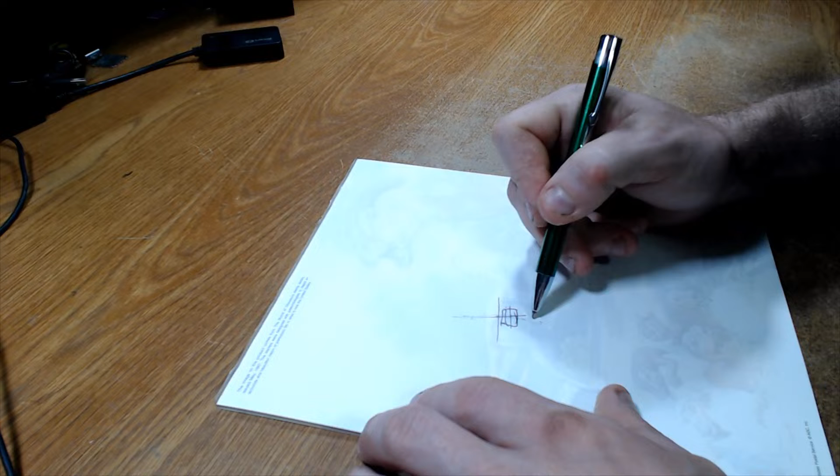Basically a joystick, as far as I've researched, is an axis on a flat plane. And as it turns out, they actually use the same exact centering mechanism that I was going to use originally in the Muse Dash left-right controller, which is a spring. So the spring is just down here, and when the axis goes off center, the spring wants to recenter it because it wants to extend all the way out. So it's a compression spring. It wants to go back to neutral, and therefore neutral will be the longest distance being straight up and down.

So we will design around this basic format, and then for the general design, again, I want to do a palm shaped, so a half dome shaped controller. Palm shaped is not quite perfectly circular, right? We'll deal with that as we get there. And that will just go on top of this axis. It will just look from here down like a regular old joystick axis with the micro switches around the corners here. And I will be going with micro switches as opposed to an analog input, just because, again, as it turns out, arcade sticks use micro switches, and I would like to keep with that.

So anything else to say? Oh yeah, buttons. I do want to have some buttons built into the control itself. I've been thinking about it, and thumb obviously makes sense. Thumb button makes sense. Two buttons here, left, right click, makes sense. I don't think it makes sense to have either of these two. A button on this finger can be a little tricky depending on the shape of the thing. So for example, if I make it full palm shaped like this, you can see how this button going on the corner here is kind of awkward to hit depending on how that lines up. My finger doesn't really want to go in that direction.

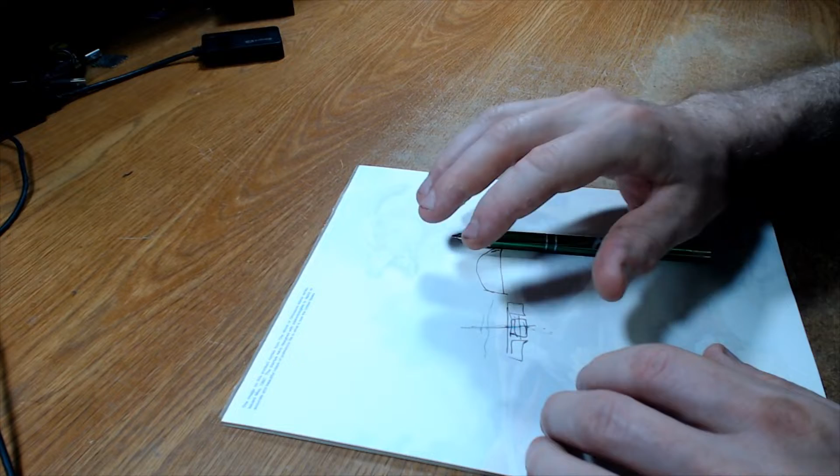Plus, just basic tendons, these two tendons are together, so you're more inclined to click both of these at the same time. And for the pinky, depending on how round we have this, the pinky is going to be in at a weird angle, so I'll leave the pinky off. So we'll just have three buttons: left click, right click, and then the thumb button. I also toyed with the idea of having a 3-axis controller, but I think that's a little ambitious at the moment. Maybe we come back and add that later on, but 3-axis is probably more than I'm looking to engage in at the moment. So that is the plan. Not much drawing today because it's all very straightforward, all stuff we've seen before.

One thing which I did not bring up, which I will bring up now, my research, because I did not have a great idea of how exactly. I mean, obviously, from when we did the first setup of the prototype, I did not have a great idea initially of how a joystick worked. Again, I assumed it was analog, just like everything else. And by everything else, I mean just like a game console controller, and that is evidently not correct.

Also, I am glad I am previewing this because that is not the window I was looking for. Okay, cool. So let's swap you out to, let's see if I can find this one. I just wanted to get this page up. There it is. All right, cool. And push live. So I did come across this page, which was very useful, and it's a Slagcoin joystick page. And not this one. Let's see.

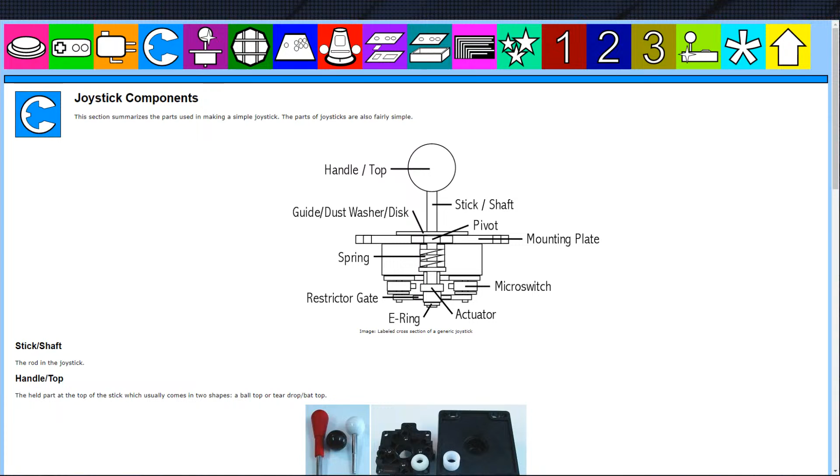Otherwise, like I said, it turns out that they're built more or less with the springs how I just assumed it was naturally built, which I was quite happy about. So anyway, just wanted to throw that page out there, I was very happy to have something to confirm what I was thinking. So let's hop back to Fusion. Fusion, because I have to capture the full screen, is full screen, so I gotta actually minimize the other window.

Alrighty, so as you can see, I already got the basic stuff up in here. You should be well familiar with this if you watched all the other segments of this series. The prototype controller obviously is built off of these 2020s, so we just got that in here. I've got, I believe, some parameters brought in. Let's check. No, not really. Never mind, I take it back. So don't actually have parameters, but we don't really need them. So we will go ahead and get to building.

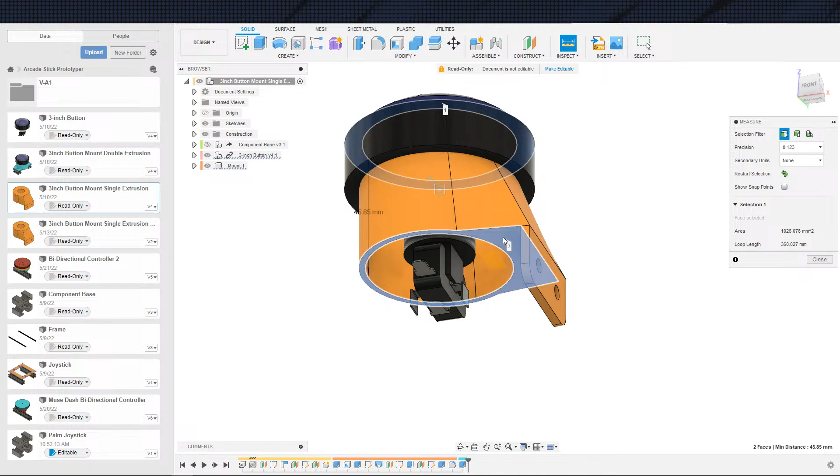And I believe 30 millimeters is my height. Let me check that really quick, actually. Let's open up a previous one. Well, we'll open up a couple of them because I think there might be some variants, but I'm not 100% sure. 3-inch button. What's the top of this guy right here? That right there. Okay, that's 45. Just to get a baseline height of what I had these guys at, 44. So actually about 45 it looks like. Let's check the Muse Dash controller. Top of that to that, 47-ish. Okay, so yeah, around about 45 is where I'm starting at.

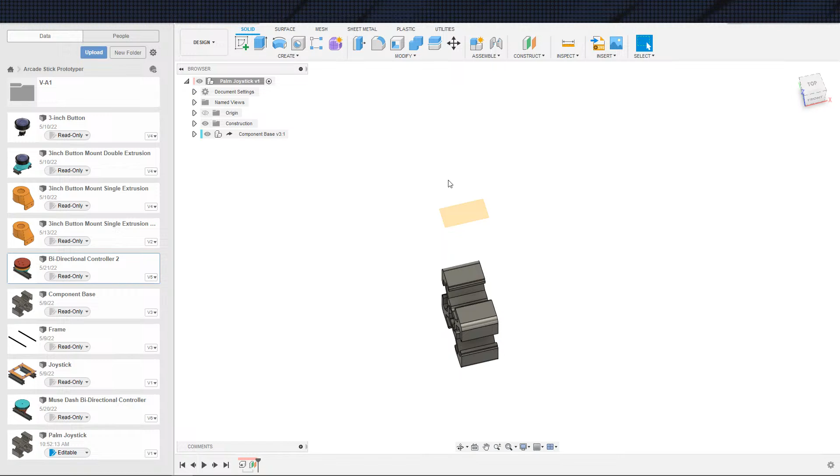Maybe this is 30 right here. I don't know. Actually, it's easy enough to check that, so may as well check it. That's 27. Don't save. Inspect. 30. Maybe that's where I got the 30 from then. Maybe the bottom of the button is 30. 28. Alright. Probably just rounding in my head. So we'll stick with the 30 and figure we'll make up the difference to 45 along the way. So this will be the base, or the pivot point, I guess.

So let us make a new component. And let us see. What is this going to be? I think this is going to be the mounting plate, is where I'll start. Let's grab that, and we can turn off the 2020 for now. We'll come back to that later. And no reason for it not to be round. There's that. So this is going to be a hole in the center where, wow, can't talk this morning. Amazing. This is where the pivot point is going to be.

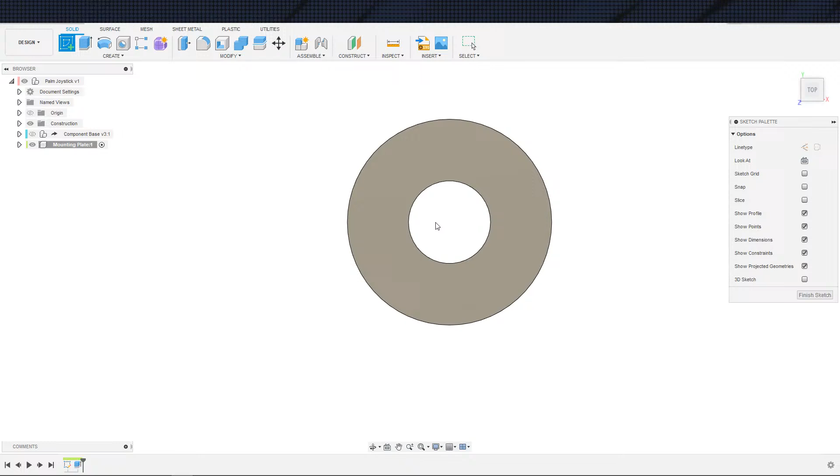And on other joysticks, you'll often have a plate around the shaft that moves with the shaft and takes up the extra space so that stuff doesn't fall in between the cracks. So if you imagine, if I extrude this out really quick, 10, whatever. And then I've got a shaft in here. Just drag it up. So you can see how there's this gap in here because the shaft needs to pivot around this area. This inner hole determines the swing, basically, of how much it can move. So because we have that in there, we have this hole now.

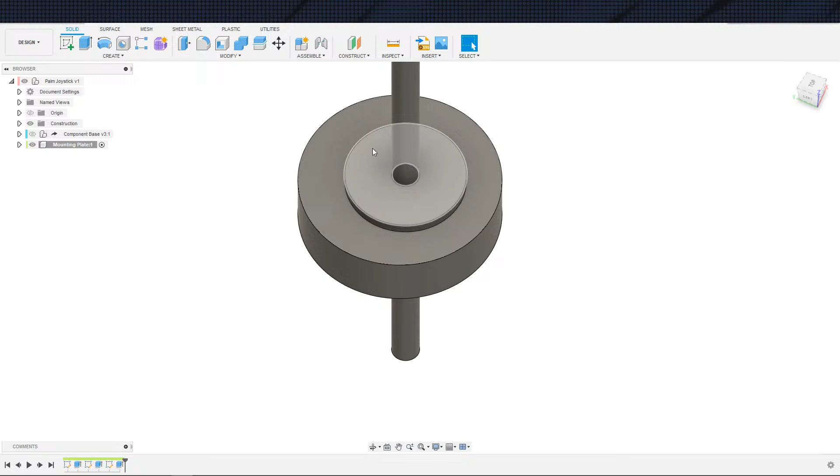And oftentimes what they will do is throw another disc on here and extrude that out like this, and that way this disc can move around to cover up the hole. It's larger than the hole so that the hole is never exposed no matter where the shaft goes, and it's tight to the shaft so nothing falls between the shaft and this disc. So that's how it's normally set up.

But because our design is going to have the large palm area on top, there's not really a need for us to do that, because that's going to cover up and keep anything from getting inside anyway. So I will not bother putting that disc in.

And the other question actually is whether or not I don't make this mounting plate a half hemisphere as well, or roughly that shape, just because as we pivot around, our shell that's going to be on top that we're holding on to with our hand, that one of those things can go over the edges. That way it's not impacting on the edges because it's larger.

So for a normal joystick, let's swap back over there. Which one was that? Which scene was that? Preview. Where is the joystick? Okay, there it is.

So for the joystick, you can see how this shaft just has the ball on top, and therefore no matter how far you turn it, it's actually going to impact on the inside of this hole before anything above the shaft, the handle top, hits the mounting plate. So for that reason, it's not a problem.

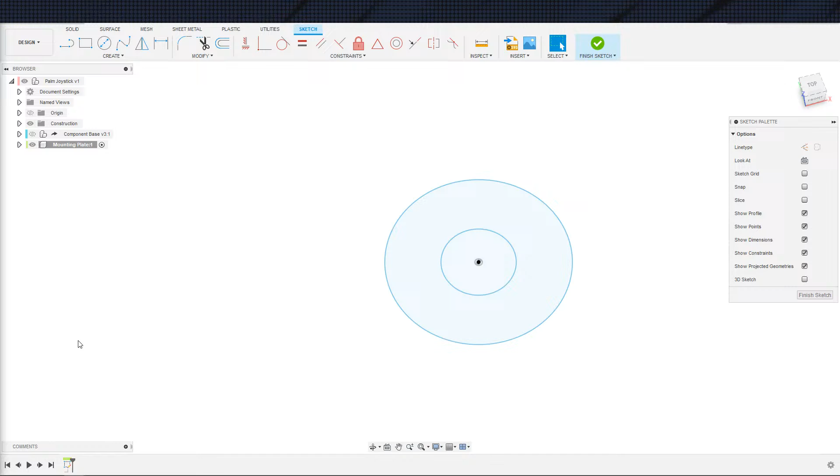Now, technically speaking, the mounting plate should be mounted, quote unquote. So we're kind of changing our definition a little bit, but that is the point I'm getting at. So back to Fusion. Push live. There we go. All right. So we are back here. And now we got questions.

So for the shaft itself, there's a couple things, right? One is swing. Let me just do this in Fusion, because having the computer do math for me is a lot easier. Ignore these guys for right now. I'm just going to construction line them so it's easier for you to ignore them. So we're assuming this is our joystick shaft right here, right? And let's say we want to go 30 degrees. And again, 30 degrees just being a round number, a divisor of 360 is how I should put it.

So if 30 degrees is the offset, which, per the Muse Dash bidirectional controller that I made, was actually a little bit overkill, I found, but we'll deal with that as we go. Especially because the other thing with actual joysticks, and I did not incorporate this into the Muse Dash one, but you can reposition the micro switches so that they're closer or further away from the pivot point to make the swing greater or less. This 30 is just nominal, and we can adjust it on the bottom side with the micro switches. So that all being said,

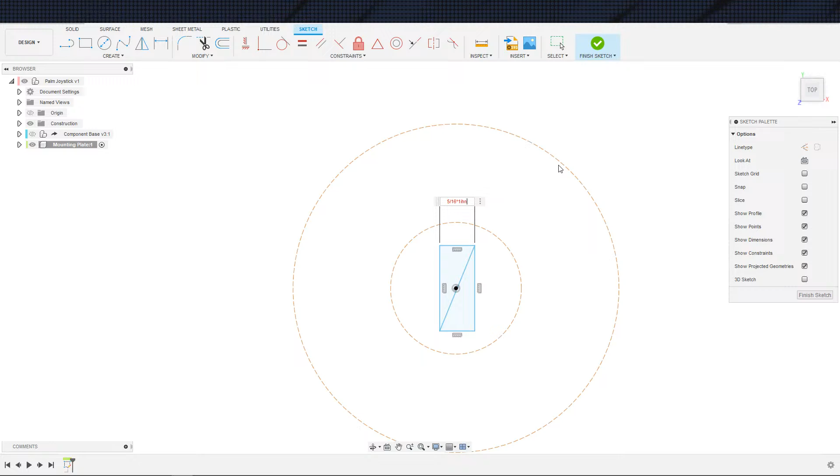basically what I was getting at here is I should probably not draw these as lines. Okay, that is just that one. I'm thinking of using the 5/16 rods that I keep on using because I have them for free at work. Okay, and then if these go off 30 degrees, then basically I just need to make sure that the distance here is 30. There's that. And you should be a right angle is my problem here. Right angle, there we go. So I'm just double checking. Okay, everything seems to be looking correct.

So my point being is that, and I could have done math on a piece of paper, but I am lazy. So basically, if I take the midpoint here, this is my radius in theory before the shaft clips the edge, which is about 5¼ millimeters, right?

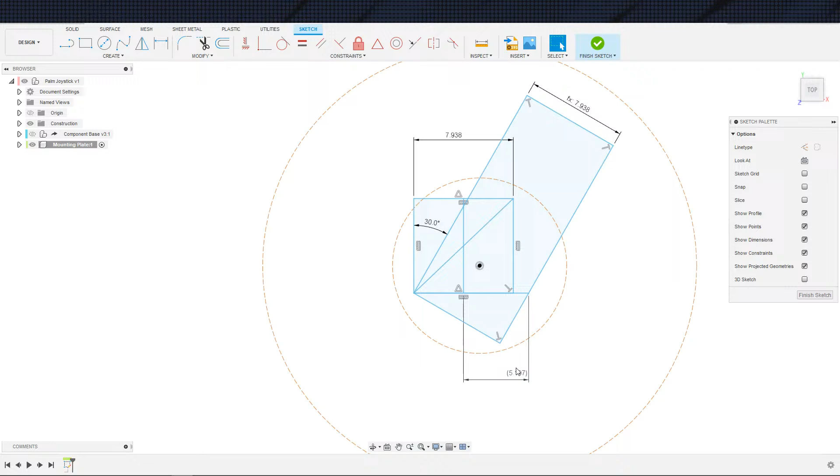So the shaft, when it's off on this angle, the edge of it across this axis right here, again, this being my mounting plate, in theory the pivot point, the top edge of the pivot point, in theory 5¼ millimeters. We'll make that 6 just because, why not? So long as we make the radius 6, which would be a 12 millimeter diameter, we should have enough clearance for the stick to swing.

Yes, delete. So I will go ahead and unconstruction line these guys, and we'll dimension this out. So we said 12 there. And then this one is kind of whatever for the time being. Basically, I'm probably going to come back here and redimension this after we have the top handheld portion done. It's one of those things.

The only reason I'm starting on the mounting plate right now is because I went from the base. Had I started designing this from the other direction, again, a million ways to skin a cat. Had I designed this from the palm downwards and positioned the other pieces relative to the handheld part, as opposed to starting in the middle and positioning the handheld part relative to the pivot point, I wouldn't be running into this situation right now, so that is where we're at right now.

The other thing I should mention is I kind of like the aesthetic of the dome-shaped mounting plate. That's going to be, as I mentioned, a little bit hard to mount to anything. However, one thing we could do if we didn't want to deal with that is just make the mounting plate smaller than the palm holding portion. That way it never actually collides because it's outside of the edges. So that is another option we will consider going forward, but I did like the aesthetic of having the mounting plate follow the contours of the palm as it sweeps around.

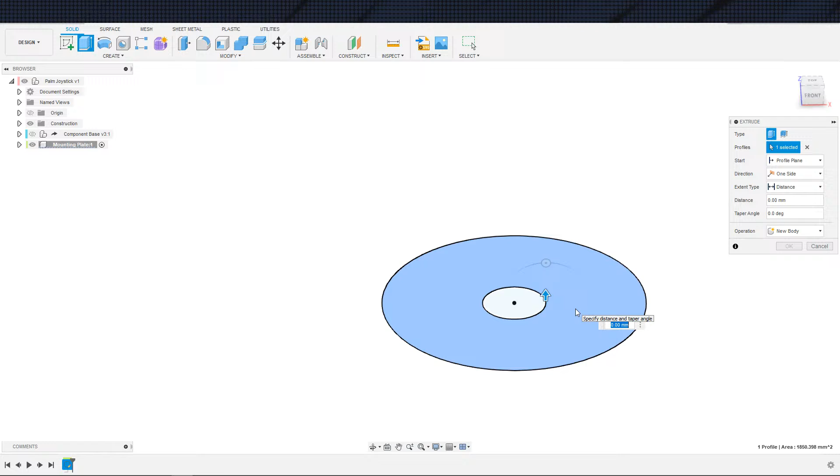So anyway, with all that said, we'll make this 50 millimeters for the time being and extrude it just so that we have a point of reference. And actually we'll extrude it down, I take it back. So this is going to be minus, and let's call it 6. We'll make it a bit thick for right now. So that's the mounting plate, and now, whoops, do not ground that. Grounding is not horrible, it's not going to screw me up immediately, but I still do not want to deal with it right now.

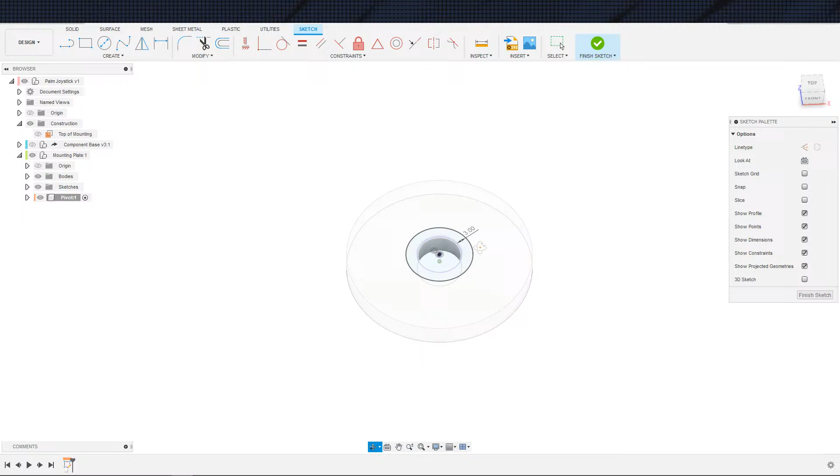Pivot, let's make the pivot really quick because that is simple enough. And I will use this top mounting plate as my starting point. Reference this hole. Okay. Go about 3 millimeters wider is what I'm thinking. And actually, well, all right. So again, there are a bajillion ways of doing this, and I think I will not be doing it this way. So let's hop back here and let's use the revolve tool instead. So let's project the top of that. Okay.

And then we are going to go ahead and, not what I wanted. Do that, do that, do that. Actually, let's keep that guy on for right now. And then we can do this here, which is 3 millimeters. Yeah. No. Actually, there's a few different things happening here, right? So I said revolve. So that's what I'm going to try to use, but I'm just thinking I probably should.

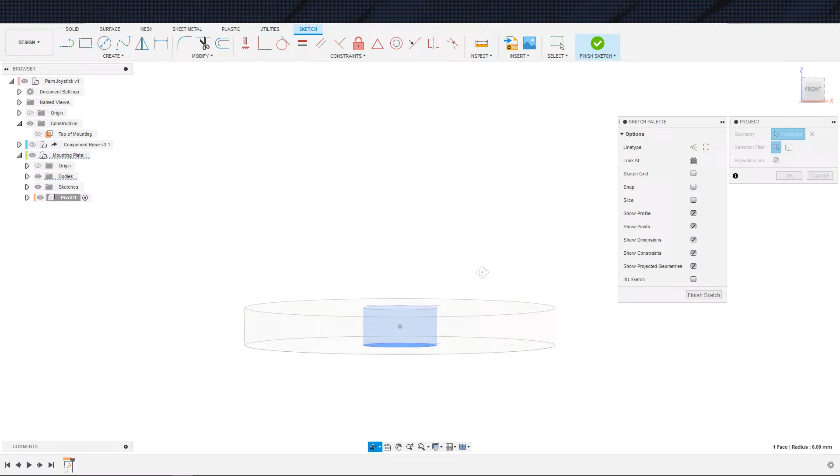Actually, let's go forward in the timeline a little bit, and let me just reproject. See, I wanted to get this hole in here too, is why I stopped. Okay, I guess that is selected. Because we also need to do this. And honestly, I was going to revolve 180, but I guess it makes more sense to not do that.

Actually, I should go ahead and throw, actually, I know I keep on saying actually. We will try to find other words to substitute.

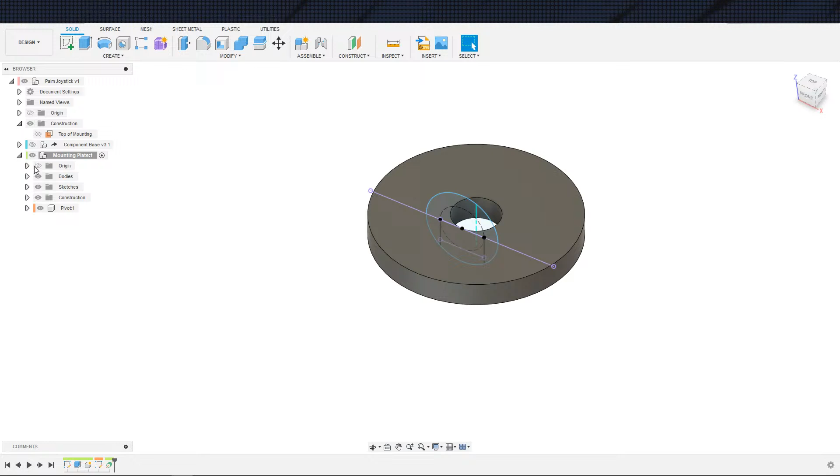Where's my, oh, there it is. Cannot see. There we go. Axis. And how did that plane get off center? No, you should be centered. Why is my mounting plate not on the origin?

Am I grabbing another sketch right now? Why can't I delete this quinkadink? Delete? How many quinkadinks are there? Just that one. Okay. Huh. Okay, whichever. I do not know why you were not on origin, but that should solve our issue.

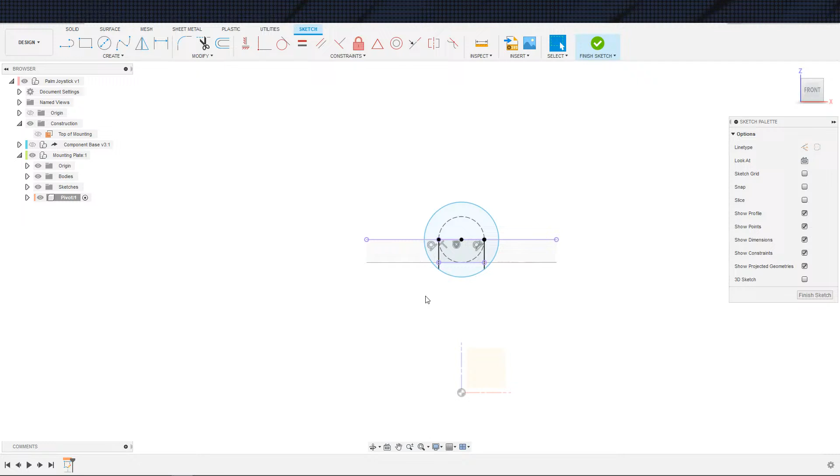Alright, cool. Now let's get back to this. Turn that body, or let's make sure we're in pivot first. Turn the body off. Grab that. Use that axis right there. And there's our hemisphere. Easy. And I have already made a mistake. Okay. This should be 5/16. This should not be the full size. Nice. We're off to a great start today.

I guess I will use a square and center it on this. Make those construction lines, make that 5/16 of an inch. And then do this and make that collinear with that, just because I prefer to have it collinear. And now let us try that again. Finish, revolve, boom. Axis is that axis I made through the center of the torus. I don't know if I selected that correctly. There we go. And that should be correct now.

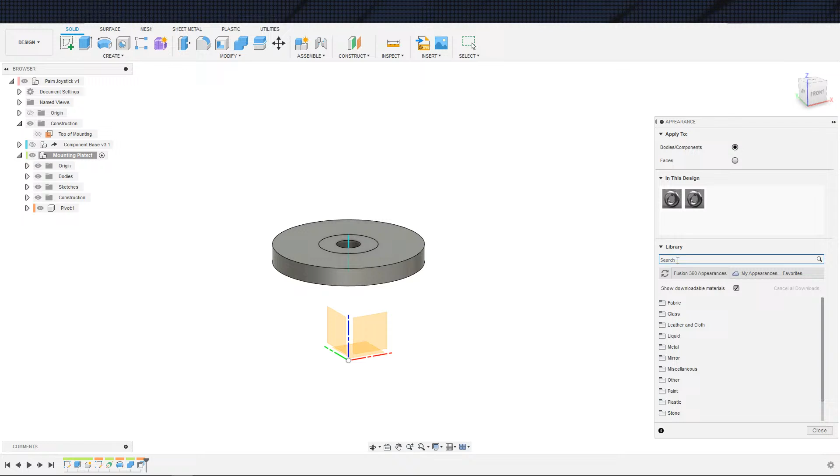Good. Now we can just go ahead and combine-a-roni these guys. Cut. Keep tools. Okay. And then I will go ahead and offset that face because this will be 3D printed and I need a little bit of an offset because my printer is not perfect. And we can go ahead and color this white nylon because in theory it should be something like that. Nylon. We'll make the base plate black plastic. There we go. And now we can move on.

I'm gonna go ahead and turn this axis off. That's fine. And let's throw the shaft in here. The shaft is kind of not part of the mounting plate assembly, so we will go ahead and make a new component. I'm gonna call this, rather than shaft, because the shaft is going to be connected to the handle and also in theory the actuator, which is, just for the record, let us get this up.

In theory they put this little ring at the bottom here, not even a ring but a little bumper at the bottom of the shaft to impact the micro switches. It gives you a little bit of extra precision on hitting the micro switches. I don't know if it's 100% necessary, but it definitely does help, so we will also be having that on there. And let's see, the spring we know about.

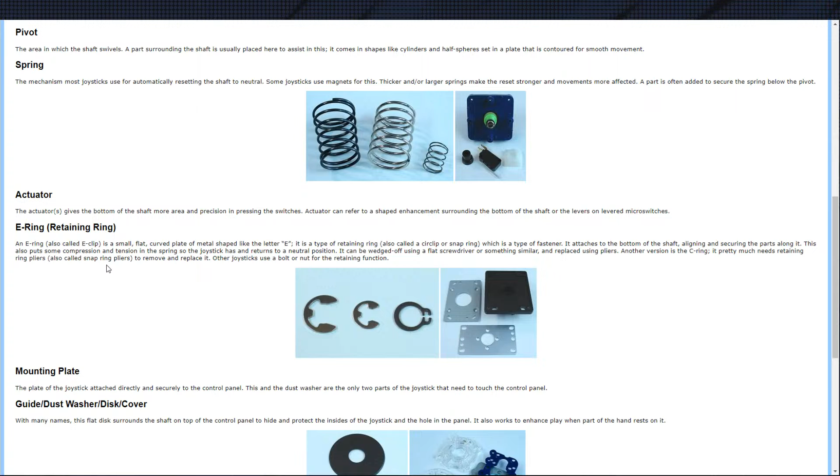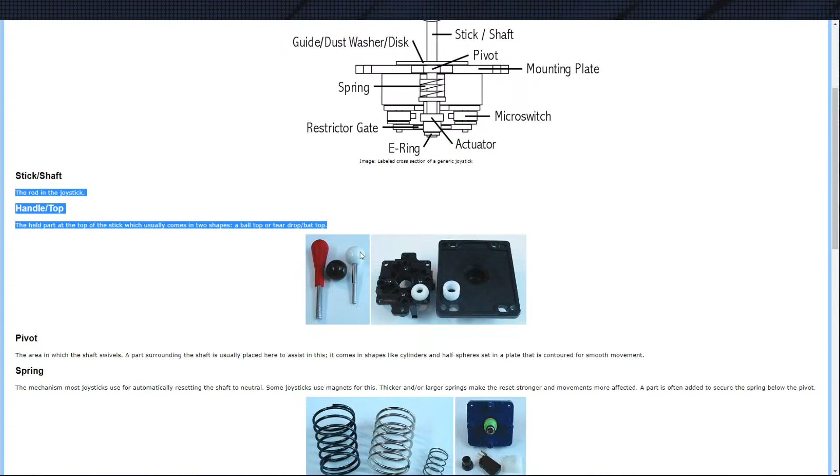I'm guessing that's what these retaining rings are for. I didn't actually read what these do, so let's take a quick look. Yeah, put some compression and tension in the spring. So I guess they do help keep the stuff on the shaft in place, in theory. I don't see them on this diagram, but I'm guessing that they do help align that bottom mounting plate. I'm kind of surprised that plate doesn't slip down from the spring. Because I don't have one of these controllers, I don't know how much force that spring generates.

I did take a quick look at some springs on Amazon for joysticks, and I do recall seeing some weight mentioned. I just can't remember what it is at this point. And the only reason I did that is because I was looking at these guys. These two right here look like they might be a little bit heftier than the wire that I have, which is, what's my size wire again? 0.037. So 0.037 is the heftiest I've got here.

They look like they might be a bit thicker, but this guy on the corner definitely is not thicker than my wire that I have. So I figured I could probably get away with it with the wire I have here, which is why I did not order one of these springs off Amazon. But in case you were wondering and you don't have music wire sitting around for springs, they do sell them on Amazon, so you could just buy one. All right.

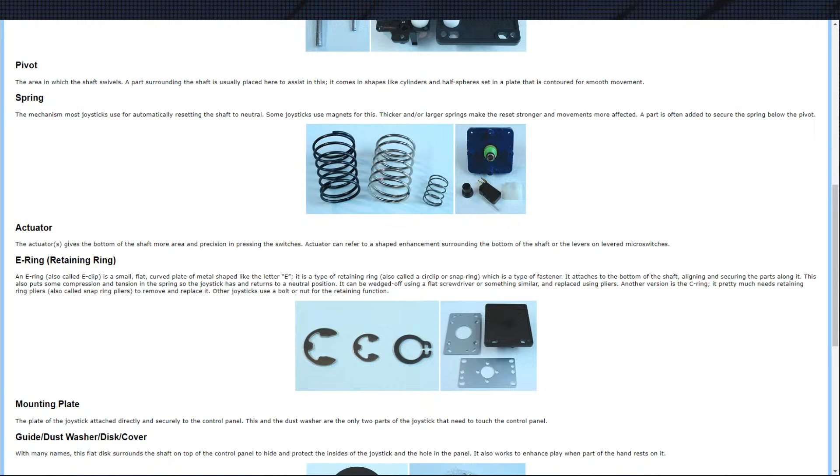So, you're going to see a background here in theory, and then I'm going to kick you over here. All right, so we are back here. I'll just call it the shaft assembly. This will have the shaft, the knob on the top, quote unquote, the spring, the retaining plate, and the actuator. Those are the things that we'll be designing into this portion. So we'll start with the shaft.

So let us just use that top of mounting plate as a reference point. We will project out this guy. Let me turn that origin back off. And we can turn the mounting plate off at this point. I want to make sure that this is my 5/16 times 1 inch. And this will be the shaft. I probably should have made the new component first, but we will cry about that later.

Now, the height is a little bit up for debate at the moment because we're going to have some extra clearance, because I wasn't going to make the mounting plate intersect with its arc. So, in theory, we can make it a bit shorter than normal. I'm going to start at 50 millimeters. I will make this two-sided though. We'll go 50 that way, and then the other direction I'm going to go at least to there,

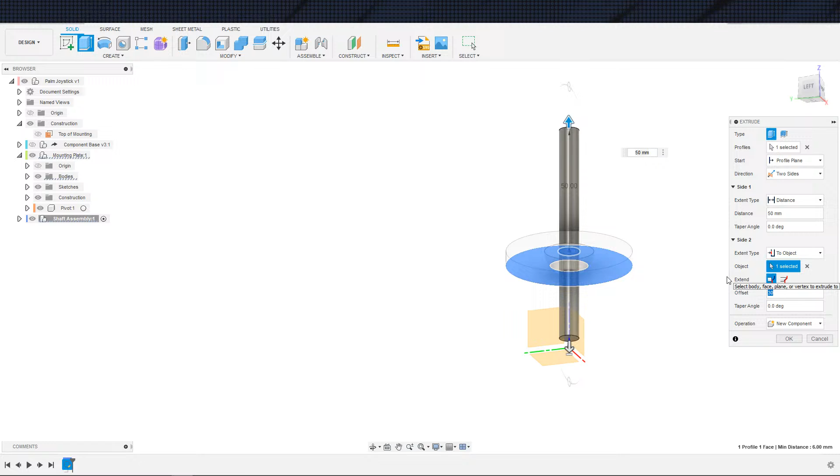and then maybe another 30. Actually, no, the spring has to be down here too. The spring, if it's an inch, is about 25, and then another 25. So I guess it's going 50 down as well. All right, so there we are. Let's open this up really quick and rename you to shaft. I'm thinking we may as well just make the interesting part first.

So, new component, handle, knob, what do we want to call this? Yeah, we'll just call it handle, that's fine. Handle's the first thing that came to my mind, so that is what we're going with. And this will be top of shaft right here. Got a name on that guy. And now we can start drawing.

This is going to be a little bit interesting to draw. The easiest thing, obviously, to draw is a hemisphere. And a hemisphere would technically work, but it's not exactly ergonomic. Ergometric. That's what happens when you use parametric and ergonomical at the same time. So actually I don't even need to take a quick look at some pictures because, give me half a second.

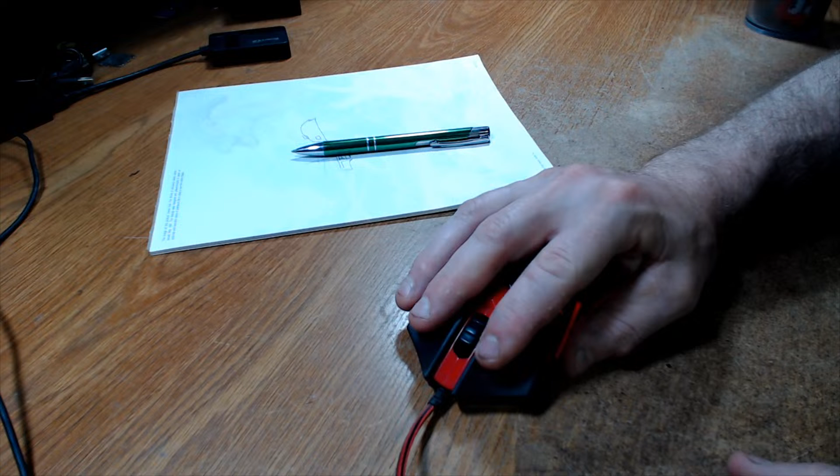With our controller though, if I make this more dome shaped, you can see how that brings my ring finger and my middle finger more in line. So if we dome it up a bit, that kind of takes care of that problem. It brings my ring finger closer to my middle finger naturally, just because I'm curving my hand more. So we can start with a more domed shape and then cut out along the edges. That is the direction in which I think I will be designing this.

Hop back to Fusion. And see, I started from the top again because I always start from the top, and this is another situation where I actually do not want to start from the top. I actually want to start from the side because I'm going to be doing another hemisphere, and it is useful to have the top thing there because I can just mid-plane it, unless that mid-plane came from the shaft. We are in the shaft right now, so it's a good thing I caught that before I completed that sketch.

So boom, boom, whoops, that was not the correct plane. There we go, that's the correct plane. Project out that guy, okay. Turn off the shaft, and we can turn off the mounting plate. And then, all right, cool, we do still have the mid.

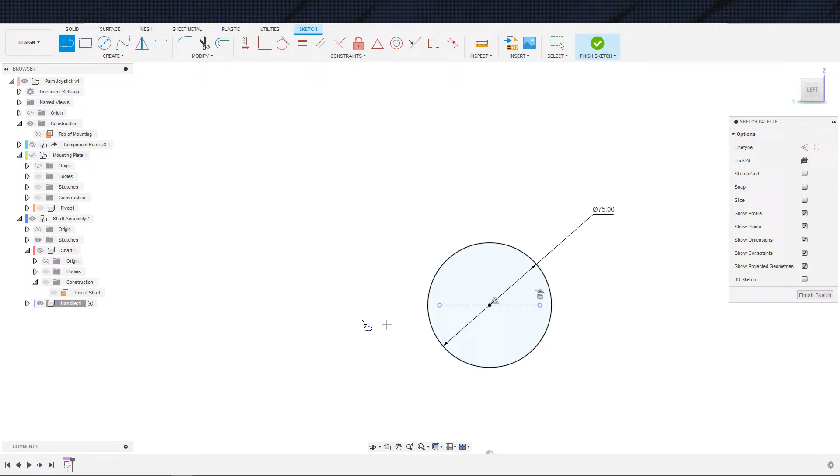We can make this a construction line, and then we want to go ahead and catch up Fusion, make this collinear, and coincident with the edges of the circle. And now we can go ahead and revolve this as well. Again, 1.5 million ways to do this. I'm using revolve a lot today just because I am.

But the fact of the matter is that you could have also just made a point and then... 180. 180 should be fine, shouldn't it? Why is 180 a problem?

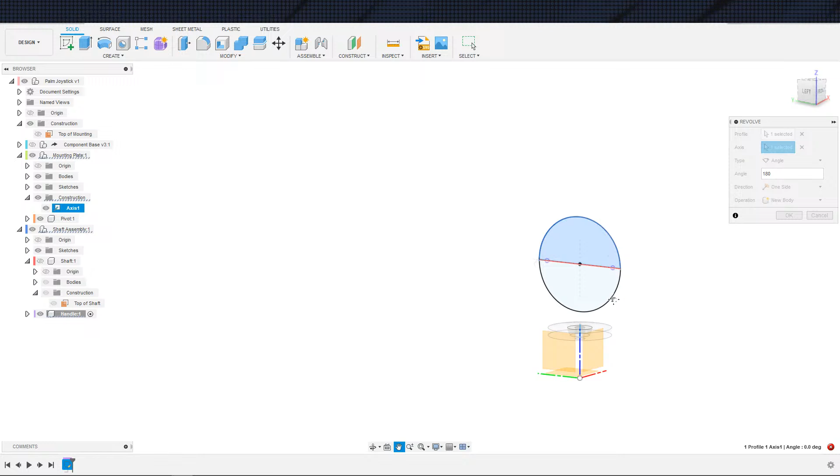So this will work now, and this will do a full 360 anyway, and I don't even need to use the construction over here. It looks like it reverted to being off, so there we go. So there is the basis for our handle. Let me just eyeball this up really quick. So the interesting thing is this may not have been the correct way to go about this.

And the reason I'm saying that is, let's turn the camera back on just because we're talking hands. So originally I went like this, and I just kind of measured with my left hand that from finger to finger, I'm like 3 inches, okay? Just from here to here, about 3 inches is about right. The fact of the matter is that if I make a 3-inch sphere, that means that the bottom of the sphere is all the way down here.

And it's gonna have a hard time getting its camera there, but you can see where the base of my middle finger is way removed from the center of my palm by quite a bit. We really only want it to be about 1.5, so working off a circle there was a mistake. We will go ahead and resolve that issue. We will come in here. We will ellipse. I'm just going to draw an ellipse here, and then I'll dimension it out in a second.

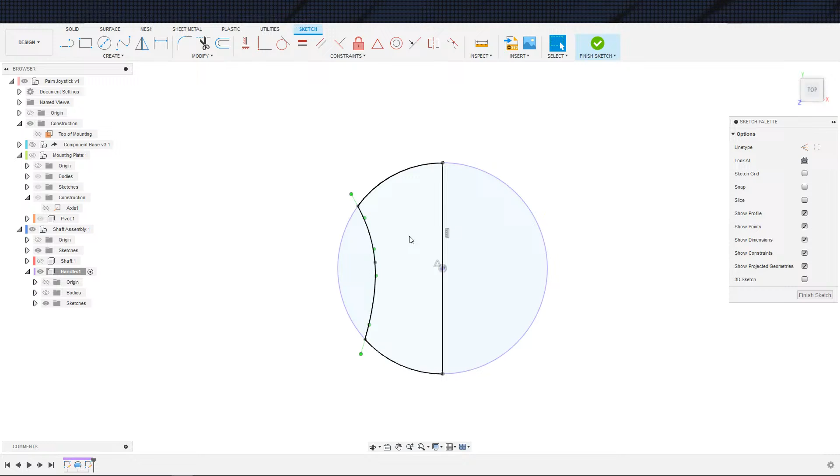My mouse is much flatter like this, and therefore the carve out for the thumb is much further back. It's all the way back here on my mouse. So let's switch you back to Fusion now and get you caught up. Obviously, all I did here was just take a projection of the ball and then cut it in half. Whoops. And like I said, this is going to be more or less centered, it looks like. So we are fine tossing this in here.

And tossing this centered on... Actually, you can't actually center that, can you? Okay, I can center this though. I can go here to here, put this parallel. And now that is centered, as you can see. And then it's just a matter of how we want this shaped, how much hourglass we want on this.

And we can also do stuff like this, right? We can also, because I'm using a spline line right here, do something like that. And actually, spline lines are a bit of a pain in the butt, because as you can see, you can do one and not the other. So for that reason, I am going to cut it in half, and then we'll mirror this way as well. So you can ignore what's happening on the bottom half right here.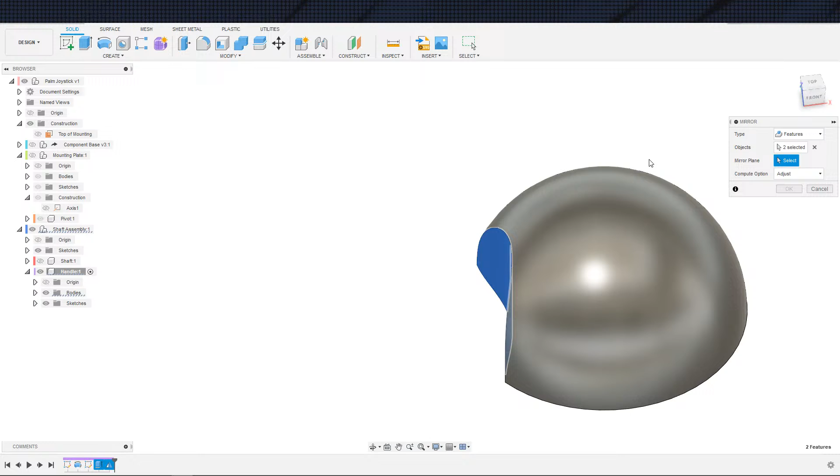And we are going to just cut out this top half. Bodies, distance all. We'll mirror it over top that, and then we'll mirror it across the plane. And that's how we'll go about this. Mirror, features, that guy, select, that guy. Okay. And then we'll mirror both of those guys, boink boink, over the center plane. Whoops. Man, I really wish the right click didn't work like that. Alright, there we go.

Now obviously this is a little violent right here. How does that actually look? Nah, I guess that bottom is not as bad, but we can go ahead and just toss these guys in here. Actually, since we already have the mirror profiles in here, may as well just add that as a mirror.

And it's a matter of how much you really want to go with this. I think I only want to go a little bit, just because any extra we do will interfere with the button that we're going to put in here, the micro switch. So I think I'm going to leave it at that for right now, and then we will compensate later. Alright, so there is that, and now we can go ahead and use the shell command and get ourselves a 2mm wall. Cool, cool, cool.

Now we can start building in buttons. Buttons. One of these things where how you design the button kind of depends. So, do I have any around here? These spare parts do not really show it terribly well, so give me half a second. I wish I had better spare buttons around here. Trying to find a good example. I don't particularly want to pull the controller apart. Alright. I think I'm going to draw this instead because I don't have a good example on hand immediately available.

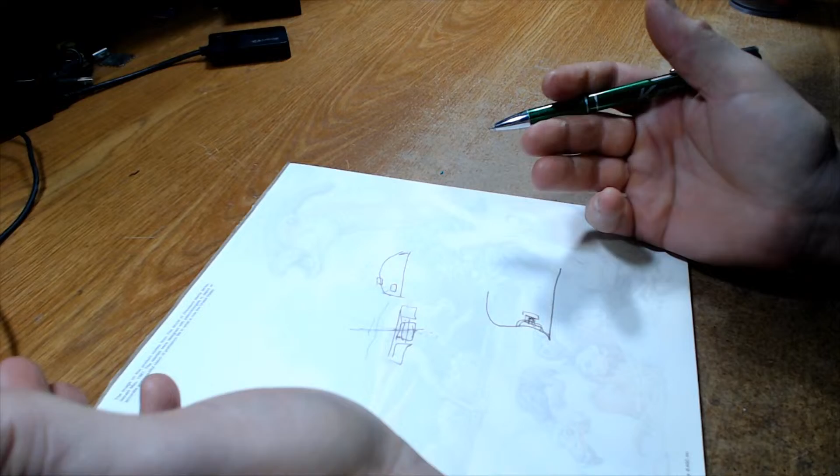The button is going to need a lip around it that is on the inside of the plastic to keep it from shooting out this way. And the reason it's shooting out that way is because it's going to want to have a stem that reaches in to hit the micro switch and a spring on that stem to reset it. And that is generally, and not always. So for example, we don't necessarily need a spring. I could skip the spring, to be fair, even if this is just a stem pushing the micro switch, which again, it's reasonable, it's not a bad thing.

And when I say micro switch, we don't even need a full-on micro switch like this, okay? Where's the actual micro switch? So we don't actually need something like this. Most handheld controllers, Xbox controllers, whatnot, don't go for a full micro switch like this. They just use regular little push buttons. Let me grab one of those.

I've got this nice and convenient random box of stuff right here that I don't organize. So I would have assumed that I would have some random button thrown in here that I never bothered reorganizing. Turns out I didn't. Turns out that all my buttons are organized right now. Let's check. My actual bag of buttons is inside of a big box of components that I'd have to dig through, so I'm hoping to find a button otherwise in one of these easier to access cases.

And by button, just for the record, I'm talking momentary switch. That is what, technically speaking, we're talking about. I do not see one in this container, so I guess I will be digging. Alright, time to start digging. Alright. Say hello to my giant box of components. Random components. There we go. It wasn't too hard. Cool.

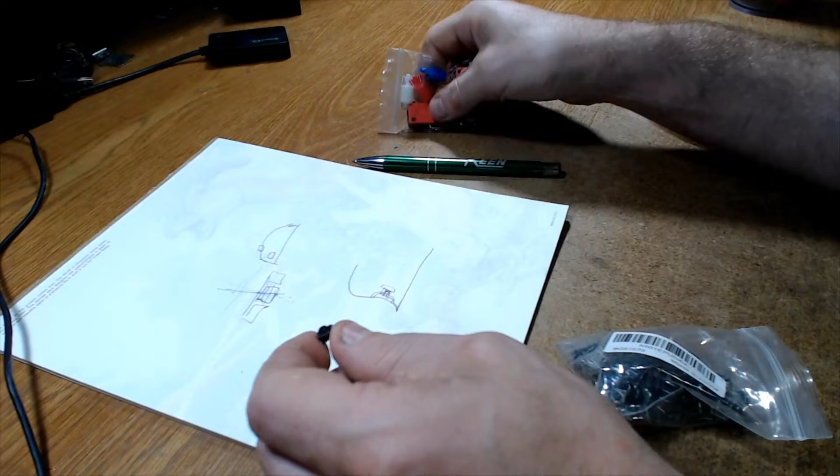So when I'm saying micro switches, we're probably just going to end up with this guy. The only kind of issue with using these guys in our specific situation is that due to the shape of our controller here, it's not like we can just toss a flat PCB and then plug this into the flat PCB, which is how it normally works. So your normal Xbox controller just has a PCB inside of it. This is sitting on the PCB, and then you obviously just bump into it with this stem that I was telling you about. So that's how it normally works.

That is a bit more difficult in our design because our design is funky shaped, right? Which is why, in theory, using a micro switch might be a little bit easier just because it has these mounting holes that we can just match to. But that is the situation as it stands, and something we're going to have to resolve, which makes our life a little bit more complicated.

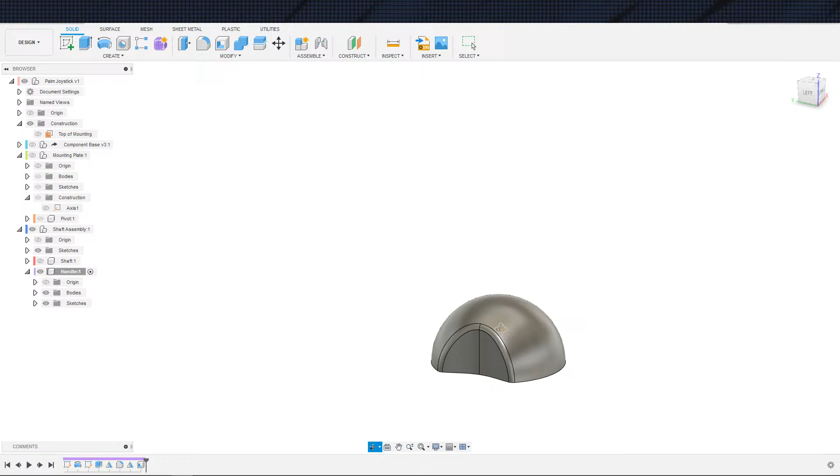So let's switch back to Fusion. Make sure we actually switch back to Fusion this time. And come in here. So over here again, left-hand side, in theory, because we're catering to mostly right-handed people at the moment, will be the thumb button. So I'll go ahead and attempt to take here. Okay, because that's curved, I cannot, which does make our life a little bit more difficult. All right, can I get a tangent plane? Tangent plane from the inside. Okay, all right. We can work with this.

I'm just going to do this, and we will project out to the surface is how this is going to work. So I will go ahead and project this surface, and then actually, let's see. So there's two different types of thumb button. There is the base of the thumb button, and then there's the point of the thumb button. It really depends. I kind of like the base of the thumb button better, which would be this plane here, as opposed to the tip of the thumb button, which would be that one there. That's a personal preference thing.

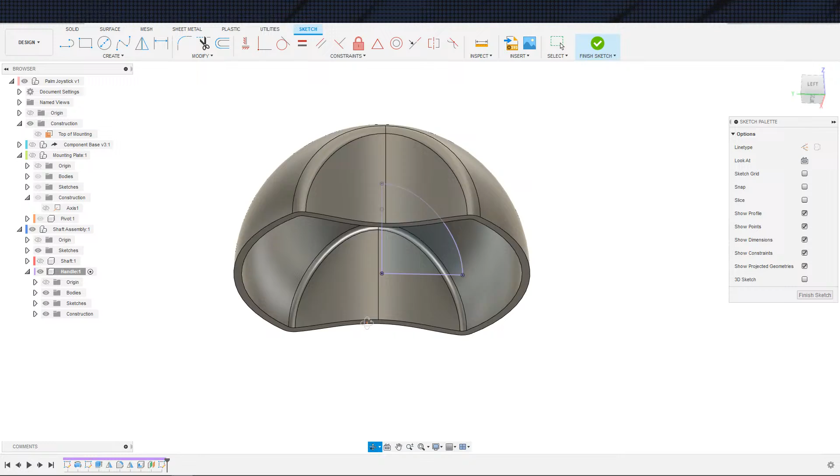Basically, you could do either, and the fact is that the tip of your thumb could just reach back to hit this if you find it a little bit awkward. So yeah, I think I am going to put the button on this face. Let's square back up to the body. And I think what I will do is make this whole entire profile and just inset it a little bit. So we will inset it by, yeah, let's start out with 2 and go from there, just because what we're going to need to do is build that rim around it, as I was saying, to make sure that it stays retained.

So let's do that. And yeah, I guess I will just extrude it and then do new component from here, as opposed to backtrack a little bit and create a new component on the fly. Now, from object, and we want to go distance to object, which is that guy, and that is a new component. And then I can hop in here. This is going to be thumb button.

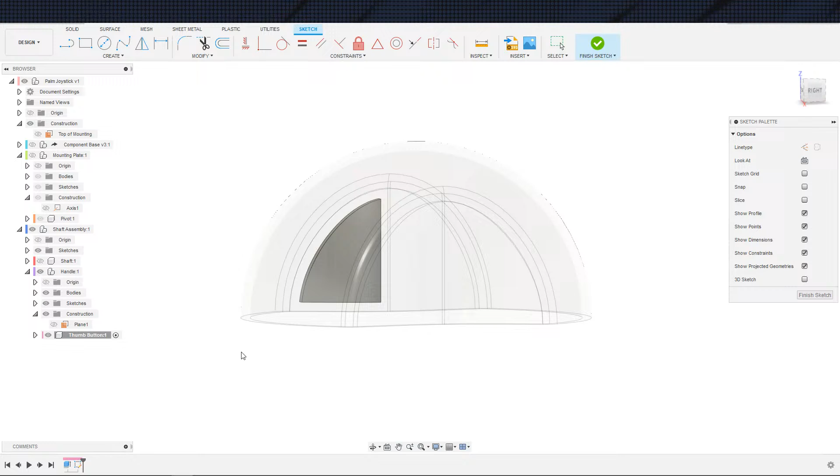We will activate that. And yeah, again, we're going to have to just use this plane here because it's a weird shape. We'll come in here, project that guy out, and, actually, yeah, I guess I'll do it this way. So the other option is just to use the full 2mm that I had, but I think I want to leave some space in here, and we'll see what happens, how it looks.

But here's the other thing. We're going to go distance from object, but we probably want to actually offset this back 0.5 millimeter. That way it's somewhat... is that the correct direction? Give me a second to turn this handle off so that I get a better idea of where I'm at. And let's just throw 1 millimeter on here. Okay, yeah, that is set back.

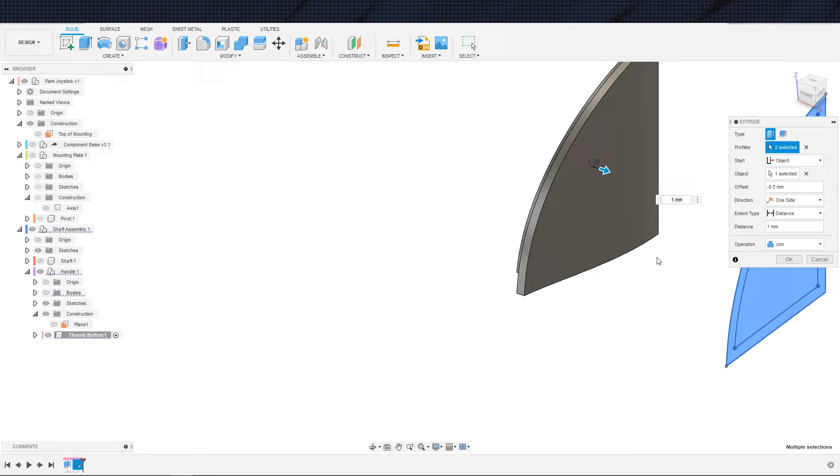So, let's actually select this as well. Attempt to select this as well. There we go. Join. All right, cool. There we go. So this retaining portion is slightly in the wall now. And the rest of that will be fine. The rest of that will be at the face of the wall.

And now I'm going to want to cut and then offset the faces. Again, 3D printing, not exactly precise. So let's combine target body, that body, keep tools, and then we can turn the body back off and offset some faces to give ourselves some clearance. I tend to offset... well, actually, it depends. Yeah, it really depends. So right now, I'm offsetting these guys.

The reason I am not offsetting the body in this case is because these edges could get weak. Plus, the edges could run into calculation problems inside of Fusion when we butt up against these inside curves here, and the outside curves technically, but we're further away from those ones. So that is the reason why I'm offsetting the button rather than the

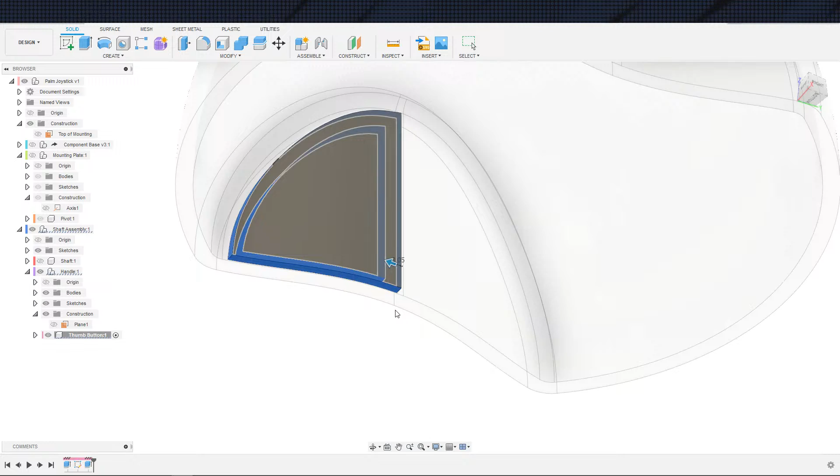body itself. In some situations, I will offset the body itself, especially because this button is relatively small, so the details we kind of want to preserve, but unfortunately, that's not really a viable approach at this point because we need to stay as far away from these edges as we can. That is why. So now this button gets pieced into here. It will not pop out the side and it will not pop inwards because we'll put either a momentary switch or a micro switch right butted up against it so that it does not move.

Now, like I said, technically speaking, let me compose my thoughts really quick. Right now, as is, the amount of swing this thing has determines whether or not it will fall out of this hole. Right now, this hole is keeping it square. So this wall is 2 millimeters. We defined that. And then this lip is 0.5 millimeter. So we have 1.5 millimeters before this front face falls past the recess that we have in here.

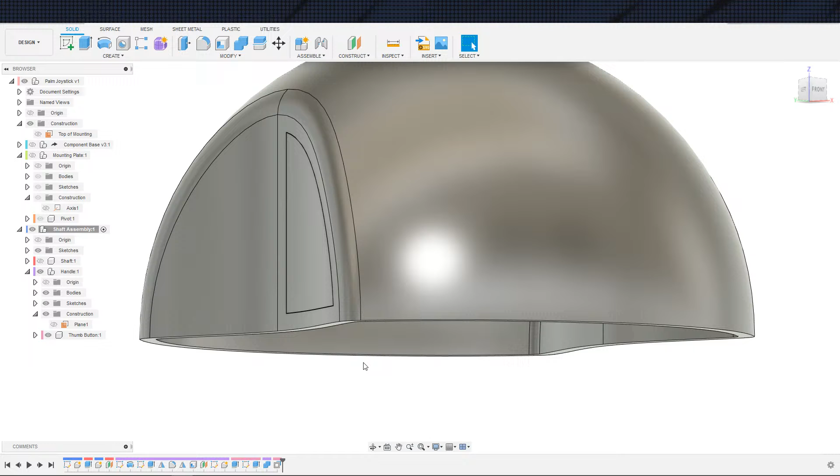These micro switches and buttons, I'm pretty sure have less than 1.5 swing, but that is something that we should have considered. So let me just do a quick experiment. I'm gonna pinch the button with my calipers. Well, heck, we got the camera, may as well use it. So I got my calipers. We're gonna pretend I just turned them on.

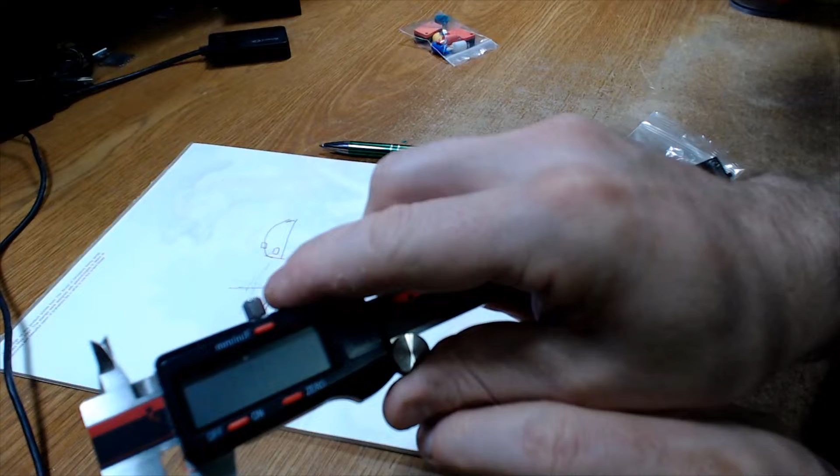I'm gonna pinch it like that, right? 0. And then, as you can see, that's 0.3 millimeters, 0.4, let's say. And then it goes back to 0. It might be hard to see on the camera, I just realized. So we're at 0 right now. I push, get down to 0.33, it's saying right now. Let go, back to 0, so I know that I'm in the correct place on the button.

So that button has a 0.3-ish millimeter swing, which is obviously much less than our 1.5 that we have in here to make sure that the button doesn't pop out. This guy, we set up.

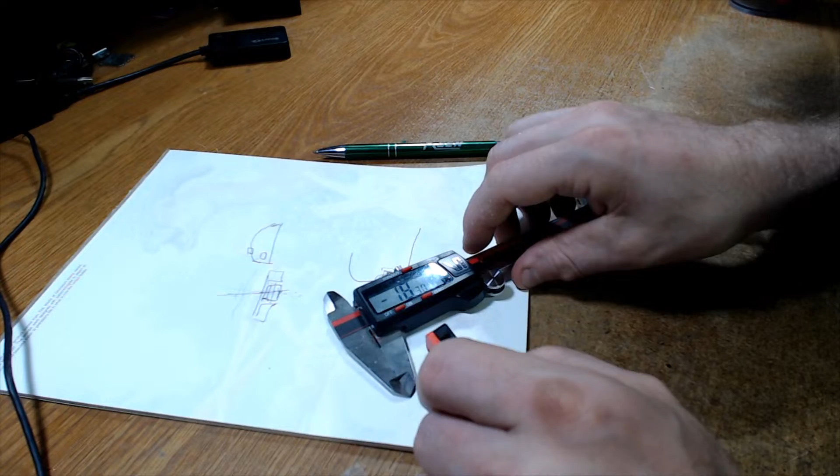Try not to depress the button. Depress the button. That is 2.3. That is a full 2.3. So if we ended up using this guy, we need some kind of stop on the inside to prevent the button from, I'm going to switch it back to Fusion.

We need some kind of stop to retain this to keep it from going to 2.3, or otherwise we'd need to extrude out around this. So for example, yeah, it's going to be hard to do, but extrude this wall around this recess in order to give it more space to decompress.

So those are different things we'd have to keep in mind, but I think for the time being, I'm going to plan to just have the small momentary switch pressed up against the center of this button, and we'll keep it simple. And like I said, because it's a momentary switch as opposed to the micro switch, I'm not 100% sure, but I imagine it makes more sense to go ahead and just put a stem on it.

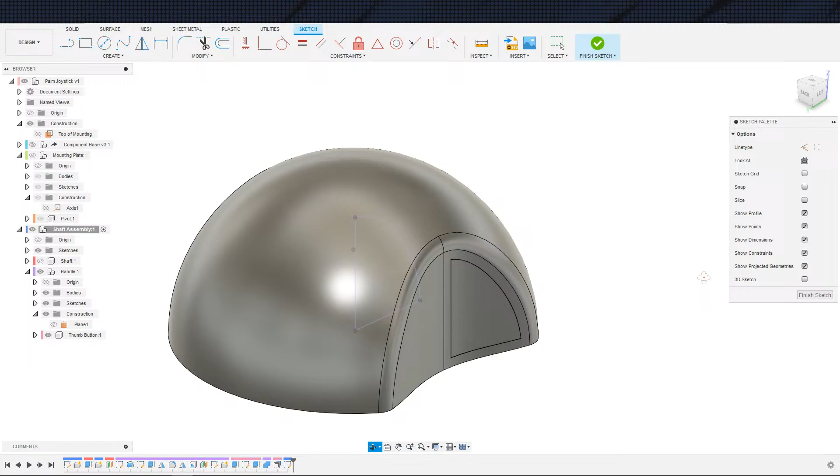So again, because we're working with this weird shape on the inside here, I'll just have to come back in here, project out this guy, center a little stem on it, and then extrude it out from the face. We may run into a situation where, because I'm extruding from the face, it is not quite square. I'll take a look at that when it happens.

And actually, I want to back up here and make sure that we're in the thumb button, just double checking that I don't have any sketches open, so that our timeline looks good. So I will go ahead and project that out, and we'll get it relatively centered here.

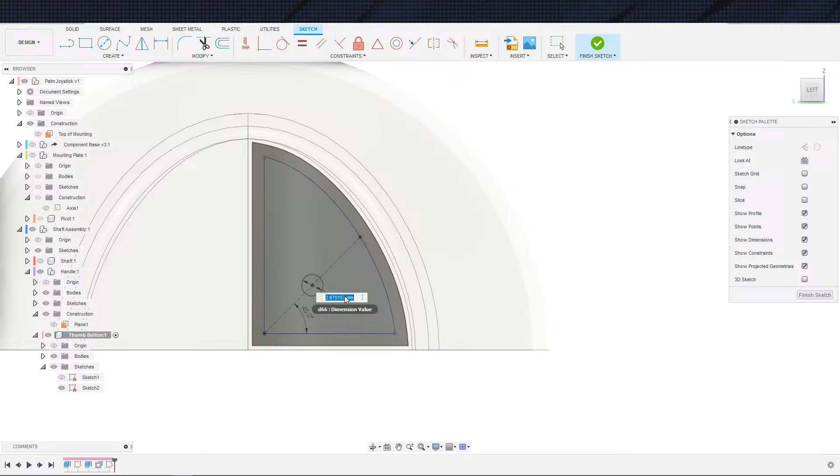It's one of those things, center is kind of going to be where it's going to be, 45, and do that. And the user probably won't be able to tell the difference. Maybe they will, but probably will not. The momentary switch again is what we're looking at using, and that has, whoops, let me zero my calipers back out. That has a 3.25-ish face on it. I will just make a straight stem for right now.

There is an argument, just for stability purposes, that maybe this should be lofted. So make it larger than 3.25 on the inside of this face, and then loft it out to a point of 3.25. But I am not going to bother with that for the moment. And the reason to do it this way instead of just pushing the micro switch right up to that button is just to give myself a little bit of clearance to mount the micro switch in here.

So if I put the micro switch right up against the button, then I have to physically piece in another piece to hold it in place. Whereas this way, by having this stem here, I can throw a plate in here. In the design, it will be printed with it, and then mount the momentary switch to the plate. And then if the stem is too long when I'm putting this button in, I can just trim down the stem with an X-Acto knife to make it fit. So that is my thought process here.

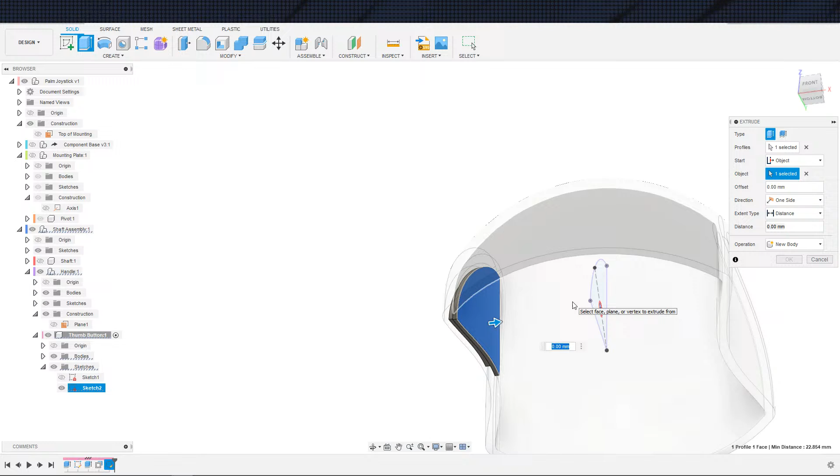So I'll just go with the 3mm here. And I'm trying to look, yeah. So you see how this follows the contour of the face, right? So we're going to go ahead and I think probably do this. Actually, I take it back. We can fix this. And by fix it, I mean we can do this a different way to make it easier, so I don't have to just hack it down here. And by physically, I mean metaphorically hack it down.

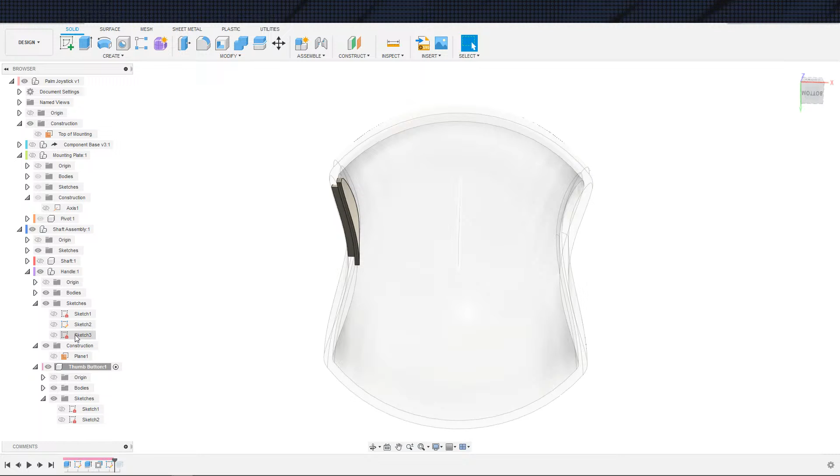Basically, now see, this would be easier if I could grab a tangent plane off something, but I can't. What would be the best way to go about doing this? I think maybe coming all the way back here. So basically, I need to get a plane in place so that I have something to bump up against. Is this my... Yeah, there's that. Okay, so let's try this. Let us come back up the handle.

I'm going to plane through... Can I plane through 3 points? I know I can do axis perpendicular at point, which may be how I'm going to end up doing this. So I'm going to go ahead and grab the sketch point is what I'm thinking. Let's turn that body off. Oh, face perpendicular at point, not actually through point. Axis through.

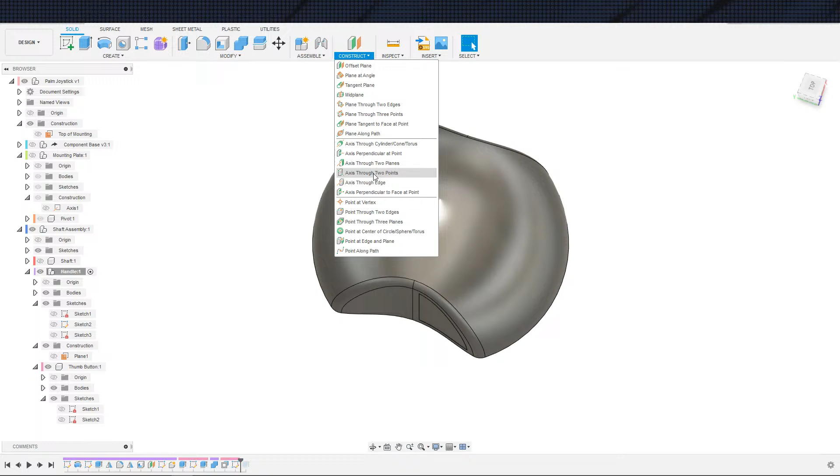Face or solid body or surface body. Alright, let's try this one. So I want this point. Now what... Not what I wanted, no.

Yes, I am just kind of spitballing here because... oh, there we go. Not what I wanted though. There we go. That's what I wanted. Okay, cool. That is exactly what I wanted.

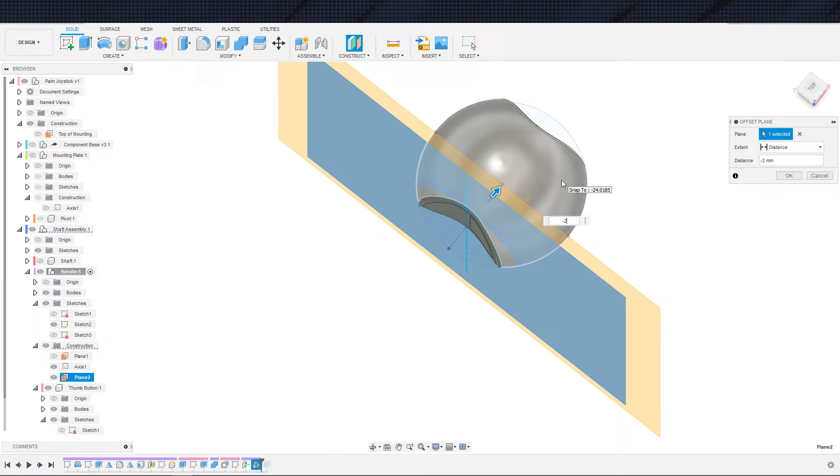And now we can go ahead and throw a construction plane at an angle through that axis, 90 degrees. And now we can go 2 millimeters minus 2 millimeters, which is our wall thickness. And then I can go another 3 millimeters, let's say, to get to the end of the button stem. I will rename these planes at some point, but that point is not at this moment.

And technically speaking, I should have added a little bit extra for the slip on the back side, but these dimensions are not strictly... Actually, you know what? I should extend it more, though, to give myself some more clearance. So let's just go 5 and call it a day. And that will give me some more clearance to get stuff in and out of here.

So we will go ahead and come back over to this, and instead of extruding out a distance, we will extrude to object. Join. And now you can see that is flat. If I look at it from the bottom here, that is flat along that plane. So that's how we went about that one. Took a little bit of work to get there, but we got there.

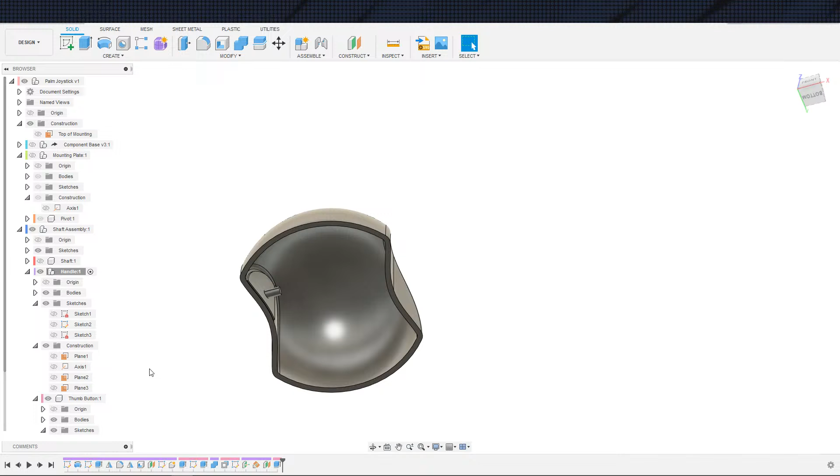Alrighty. So now we just have the left and right click buttons, and that will be the handle completed. Well, technically speaking, let me... Okay, good. That is in thumb button. Scared me for a second there. Let me do this, because the other thing I need to do is put in that shelf, like I said, for the momentary switch to sit on. Yeah, okay. Good. Just want to make sure I was looking at this correctly.

So there's that. Actually, I do want to project out the stem. There's the stem. And then we can turn that off. And this does not have to be huge. It just needs to reach, right? So we will come down here like this. And I am going to... So this is the stem right here. The momentary switch is... Actually, do I have a momentary switch in my pile of random miscellaneous?

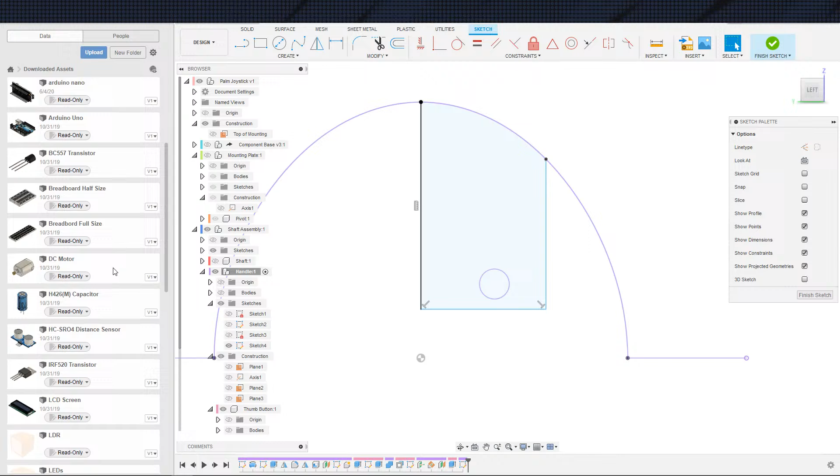Momentary switch. Let us see. Did I just see? No, I did not. Okay. Momentary switch. Let us check. Checking. There's a micro switch. Do not see it so far. Should have just been under momentary switch. If I didn't file it there, that's a mistake. Let's see in downloaded, whether I downloaded one. There we go, push button.

And let's open that up and see if that is the same dimensions as what I got here. 6 by, well, it should be a square. It should be 6 by 6. So let us inspect the length of, well, I'll inspect like this. All right, 6.05, I will take it. So we can go ahead and bring this guy in then.

Let me finish this sketch, back up a step, and then insert into current design. Attempt to insert into current design. Proceed. And you did not come in as a group. You jerk faces. Push button. Create group. Alright, cool. So there's that.

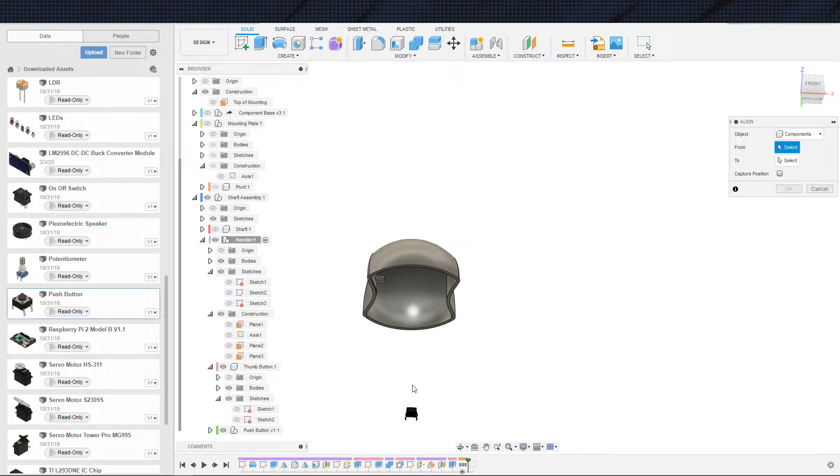Let me turn the body back on so that we have a reference here. And let's turn the thumb button on. And we can go ahead and modify, align. You did come in here though, right? Yes, you did come in as a child. Good. We will align you with that. That makes my life... Oh my goodness, you did not... Alright, push button.

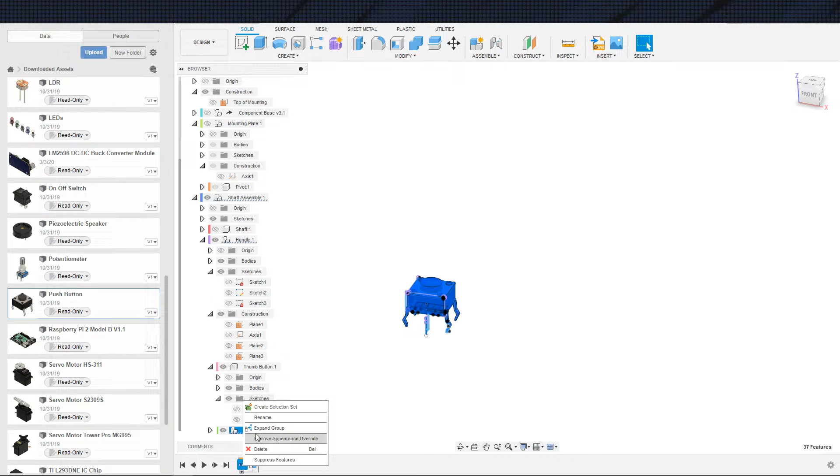And rigid group. Push button. Okay, there we go. You are now a rigid group. And hopefully that got added. It does not look like that got added to group. I wish there was an add to group button. Delete group and expand its contents. Create group. Okay. And now we can come back up here, modify, align that onto the thumb button.

Whoops. Don't be so temperamental. Alright, cool. And that gives us a reference now. Excellent. And the fact of the matter is that now this next sketch should actually be... Actually, no, I should redraw this sketch on the appropriate plane.

So let me go ahead and take a plane off the back of this guy, and I'm going to offset it by just a quarter, just to give myself a little bit of leeway. Actually, it probably should be... yeah, it should probably be more like 2 millimeters, 1 to 2 millimeters.

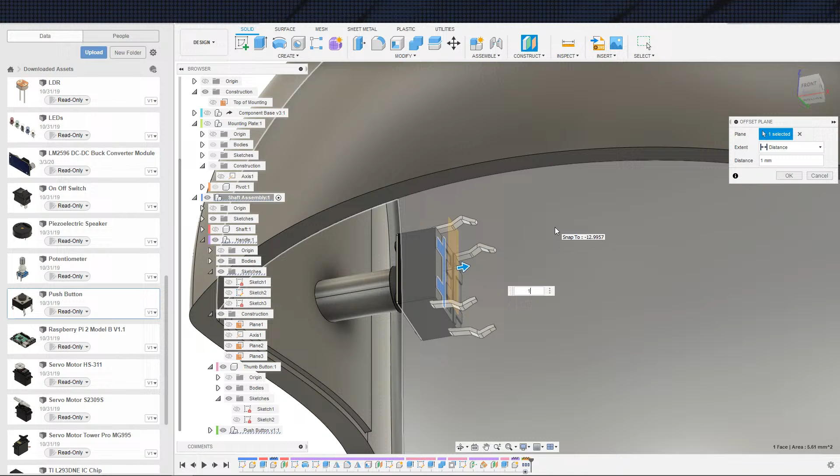Let's see where that looks. I was trying to just get past this little bump right here, because these things do not sit completely flat. They have this gap in here because of the legs, because the legs are not going to go completely flat, obviously. So that is why I wanted to offset that. Now we can grab that, project, or I guess intersect is the more correct one. Intersect. And then we can go ahead and project this micro switch.

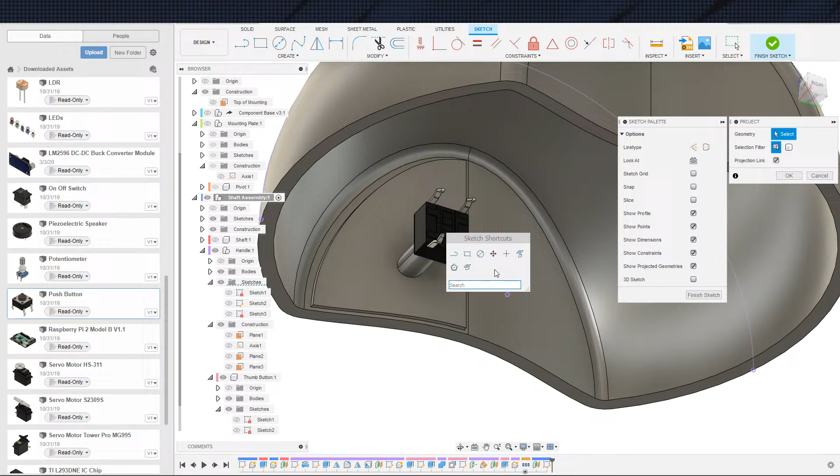Yeah, I want to... I'm just trying to think which one. I guess rather than... it's difficult. The question is whether I want to project or intersect, because the fact of the matter is that I only really need these legs, right? On this guy. Because this plate is just going to be holding this micro switch. Yeah, I think that's what I'm going to do. Okay.

Turn the thumb button off. Turn the bodies off. Turn the push button off. And now, like I was saying before, this does not have to be super huge. I'll come from the midpoint anyway. It only just has to give me room for this micro switch here to sit on. Stability is another question, although stability can be built in with struts and whatnot, so it's not as vital. So I think saving plastic is probably a little bit more important.

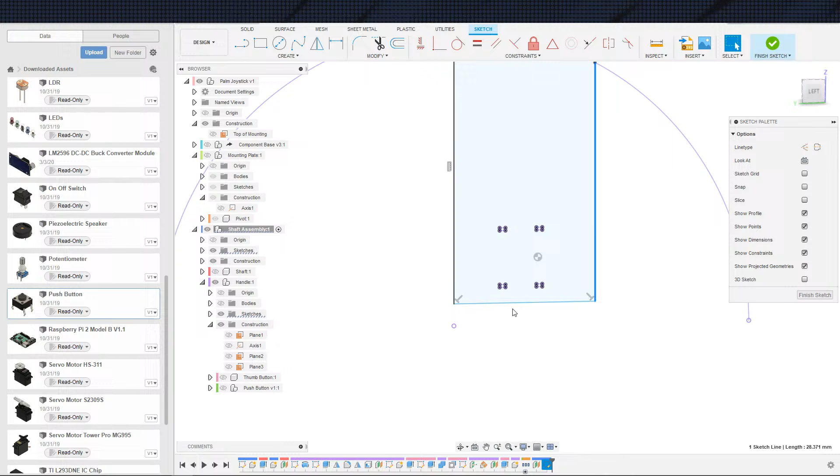Attaching it, there's a bunch of different ways to go about this. I could have this printed in, as I mentioned before. The reason I was not going to is because by not printing it in, it makes assembly easier. If I make this pieced in, I can assemble it in multiple pieces. Let's turn the bodies back on really quick. So I'll have this shell. I can then put the push button in right here, and then slide this plate with the momentary switch up and into it. That's the easiest way to assemble it.

If this plate that I'm building right here is part of the shell, that makes my life a little bit easier because I can print it all as one piece, and I don't have to worry about getting it pieced in and gluing it in or whatnot. However, I've got to put this button in at that point, and then I kind of got to flex this to get the momentary switch onto the plate. So it introduces some hazard that I can avoid if I have this as a separate piece altogether.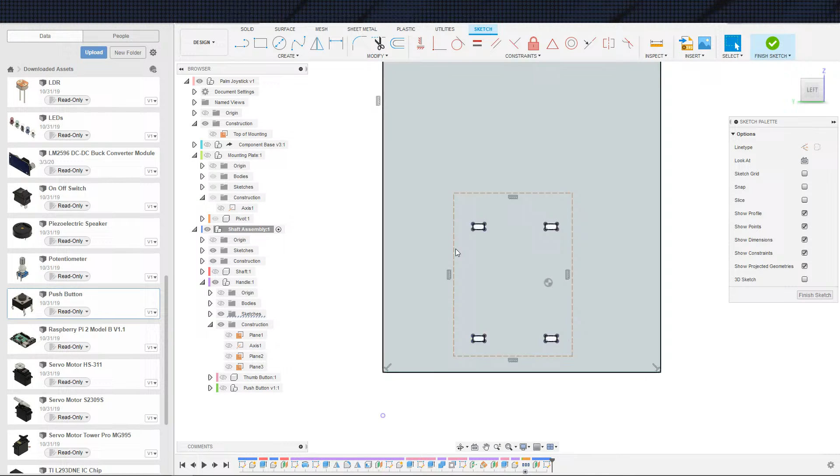So that is how I think I will do it. I think I will make this 2 pieces just to avoid the headache. And if this plate ever breaks, I can always just print a new plate. Those are the trade-offs and benefits. So let's make this construction lines, and then I just want a bounding box. Actually, I don't even need this bounding box because I can just dimension off the feet. Not that side though.

Actually, let's do this. Toss that in there. Toss this in here. And then center this on that. Actually, center was not the correct tool to be using in this situation. I want to grab the center point of this guy and make it coincident with the center point of that guy. And then this bottom can be, let's say, 3 millimeters from the bottom, because it's not really doing much. There we go. And that is above the bottom of here, which is good. That's important.

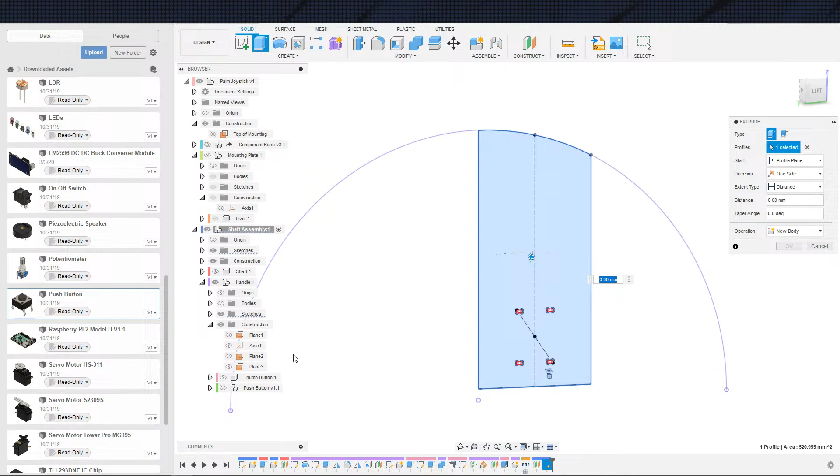So turn these into construction lines, extrude this out, body. Okay. So what I should do here, finish sketch. Let us back up a second and go a full 4 millimeters. So this is technically 1 plus 3. And it looks like I lost some of my constraints here. This was an intersect, right? So this should still be fine.

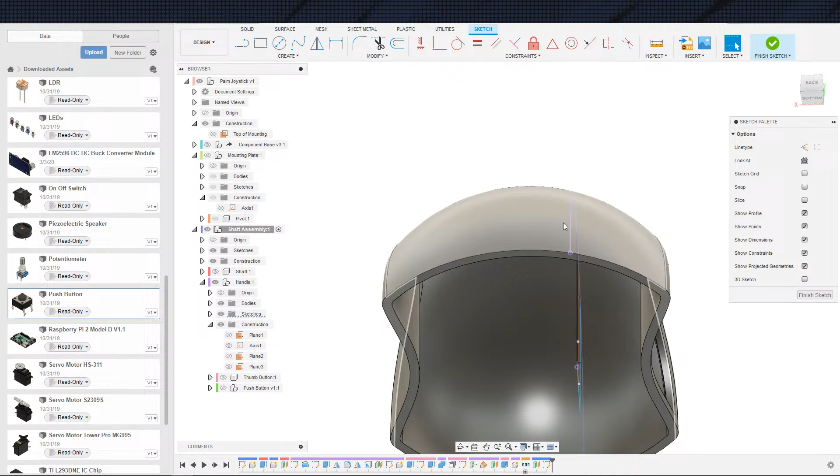As this gets taller, we get pulled away from the inside wall here. So had I extruded it right to left in the orientation we're looking at, I would have had a gap between this plate and the top of the wall at the inside corner. If I go left to right, it's getting shorter, so this is going to overlap. So let's go 3 millimeters here.

Minus 3 millimeters, rather. So you can see how that overlaps with the wall, and then I can just cut it down to make it fit. You can see how it actually even comes all the way through. So if I had gone the other way, this would have been a gap on the other side instead. I wanted to avoid that. So that is why I'm going this direction.

And let me Control Z, because obviously my constraints are off at the moment. Oh, I know why my constraints are off. At this point, those intersects on the push button are not working because we are not intersecting the push button. So I need to come back in here and we will project instead. And I actually don't want that. I want bodies. There we go.

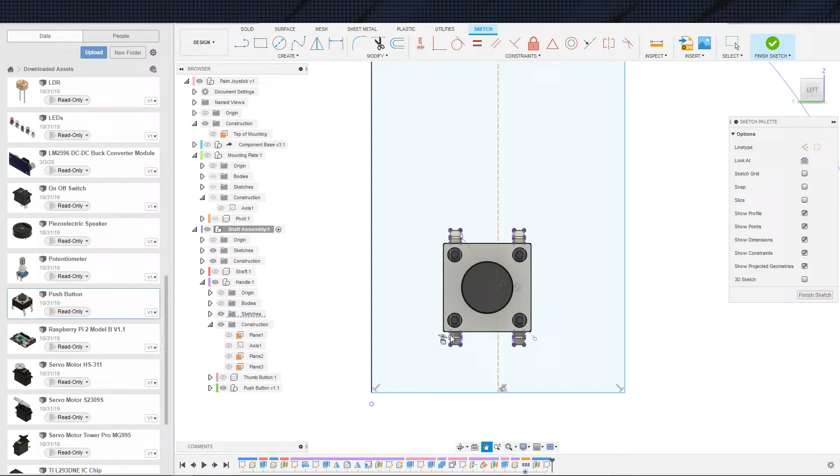And let's look at this. Turn that body off, turn the button off, and now I can fix these. Where exactly these were is kind of irrelevant because I just want nominal. My point being is that this is still centered on the button, and all I was doing was centering on the button. I can cut the holes out later. Originally, I was going to cut the holes through right now, but I don't need to. So because I don't need to, it doesn't need to be completely centered.

I don't need to know exactly, rather, where the straight parts are, where the holes are going to be. And everything is now constrained. It looks like everything is now constrained, so let's go ahead and -3 and create a new component. And I'm just looking really quick to make sure that it is still going straight. It is still going straight.

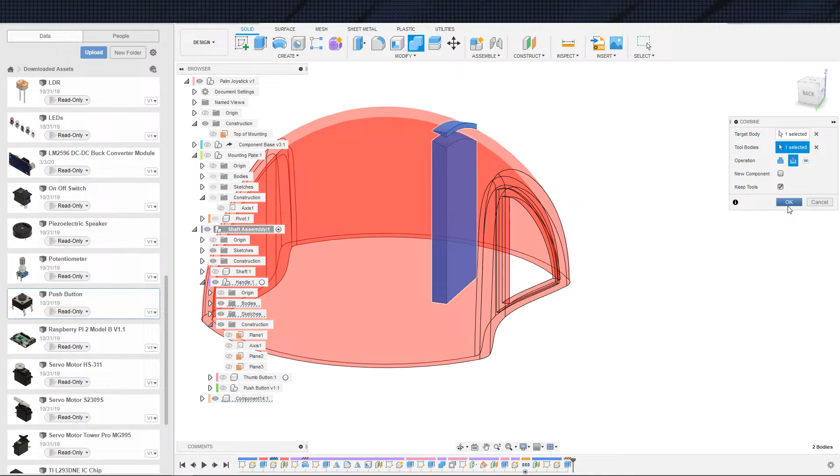So I will go ahead and combine that guy with the body for the handle and keep tools, sure. And this guy will just get removed. Remove. And it's important that you do remove there and not delete, because delete will actually go back and destroy your body from the beginning of time. So that is one of those little obnoxious things that does happen in Fusion, and you just got to be careful of.

So let's come in here, grab the front of this, rather make sure that we're in our correct timeline. We'll grab the front face now, and now I can go ahead and intersect the push button. The push button actually should be, whoops, not that though. Do I have a sketch in the way? Sketches. It's funny because sketch is highlighted, but I don't see which one I'm highlighting right now.

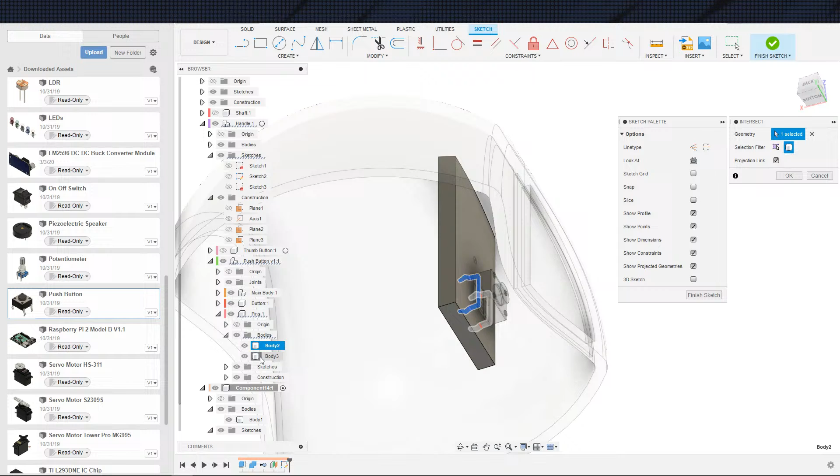Alright, let's come to push button, pins, bodies, grab those guys. We'll do it this way because something is clearly getting in my way. I'm not sure what at the moment, and I don't feel like dealing with it. So we'll just avoid it altogether and we won't have the problem. Turn these bodies off, and turn that body off. Just collapsing the tree a little bit. Yeah, very good. Thank you. Alrighty.

Distance all, and one of these things. Obviously, the legs right here. They do curve. One of those things where I'm just going to open these holes up a little bit, and then the button will be hot glued in place, so it's not going to be that big of a deal. So I'm just getting the rough opening of the hole where it's going to be sitting.

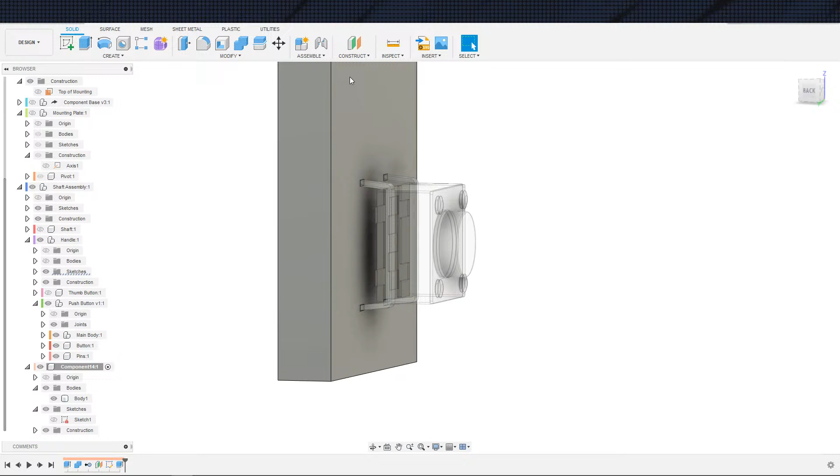So it's going to be sitting, I believe, approximately 1 to 2 millimeters away. Actually, I think I did do 1 millimeter. Regardless, it's going to be sitting about this high up off the plate, and then I will just go ahead and open up these holes so that I have plenty of wiggle room, because the button itself is going to be

Okay, what sketch am I grabbing? Because it keeps on highlighting the sketch right here. You see on the left hand side here, it keeps on highlighting the sketch every time I try to select something. Actually, it looks like that sketch is just glitched out. So that is just Fusion being silly, I guess. I'm going to rename this to button plate.

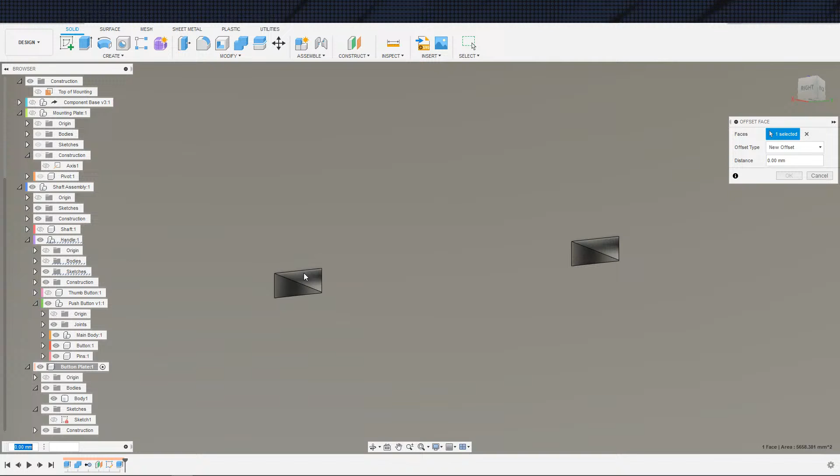And let's try this offset face again. It's not letting me select what I want. Alright, let us escape out. I'm going to hit the save button really quick, see if that solves any of my issues. Do I have anything else on that I might be accidentally clicking? It does look like I am accidentally clicking something. I don't know what though. Body.

Okay, now it's not letting me click it. So evidently it glitched out there, and I had to toggle the body off and on in order to make it. Oh, wait, why? Revert position. Don't. Alright, so I've complained about this before. Fusion needs to be fixed so you cannot drag bodies. That is the stupidest freaking feature that I have ever seen in my life. You should not be able to drag bodies in Fusion.

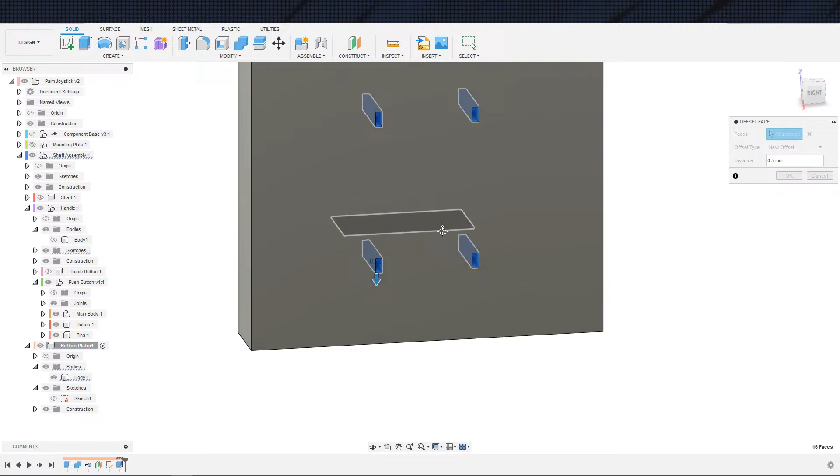We have joints for that. We have the move command. If you wanted to have a free floating movement, just drag and move, then frankly, have that as a mode that you can enter, free move mode or something like that, where you can click on components and move them. But this generic thing where I'm trying to click things and it's automatically moving them is extremely frustrating.

And that minus. And I just got to find a good size for this. It's one of those things. I want it big enough, but not so big that I have a hard time aligning it in there. So big enough that it's easy and not big enough that it's rattling around. Again, it will be glued in place, but still would like to avoid what I can.

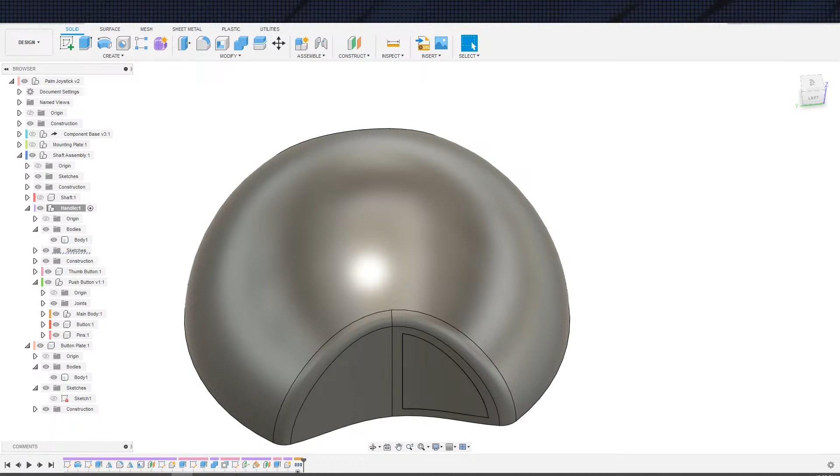Turn this body back on. Let us come in here now. And one of these things here, I should be able to do a tangent plane. I cannot do a tangent plane here, but I should be able to do a tangent plane here. I cannot do a tangent plane here. Good bunch of bad. Okay.

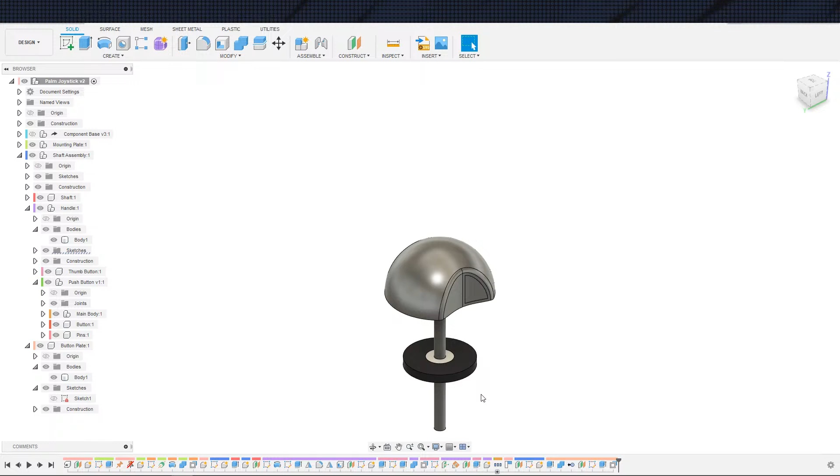You know what? We have made a... Why is that button all the way down here? There we go. We have made good progress so far. I am starting to get hungry and probably need some more coffee. This was going to be a longer than 1 hour design stream anyway. It is a complicated structure that we are designing here, and we have quite a bit designed so far. The only things that we have left to do on the handle itself is 2 more buttons. And then the bottom of it is just aligning micro switches and putting in some swing adjustment, and then getting the general look on the bottom here.

Now, looking at what we've designed so far, this whole entire piece should come down to match the shaft. We'll draw that in at some point so that we can line this down. And then once we line that down, we can determine how much shorter this top part has to be. And then we can also deal with the mounting plate. So those are the steps moving forward the next time we reconvene, which I guess will be tomorrow morning. I want to have some variety in my streams, so I'll do something else later on today. And then tomorrow morning we will look at possibly finishing this up. We are, like I said, quite far. Definitely getting there. Happy with how this has gone.

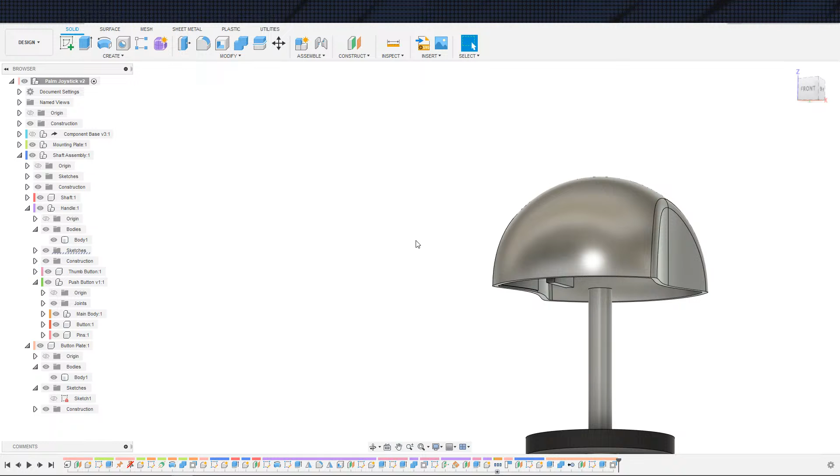Obviously, a little bit of annoyance there at the end, with the random moving of the components. You're not yourself when you're hungry, however that commercial goes. But beyond that, it was a very enjoyable stream. I got to resolve some issues, for example, getting this offset plane here. That was fun. The rest of this doesn't look exactly right now, but once we get this slid down, it's going to look a lot better and have this mounting plate look a little bit more aesthetically pleasing. I honestly think this is going to turn out to be a really good project. So I am quite excited to finish it, but again, I want some variety, so we will revisit this tomorrow morning.